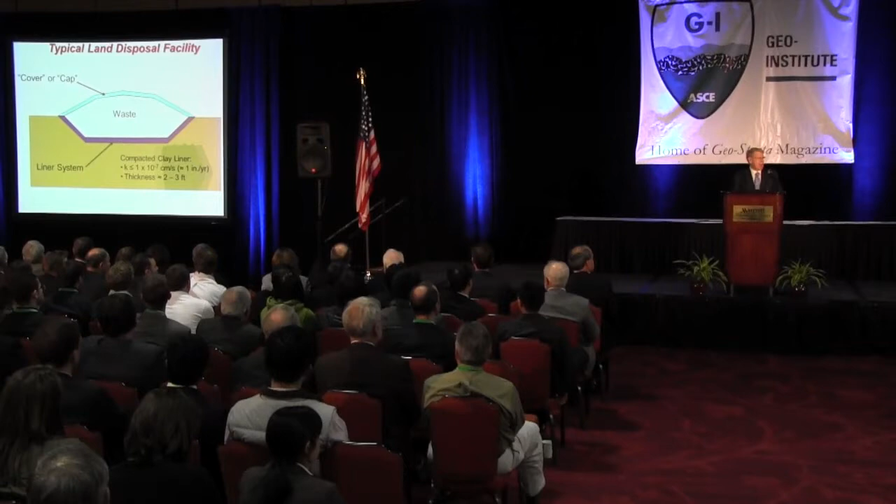As way of background, we'll be talking about waste materials, either in landfills or sites requiring remediation, that often have a cap above them and some sort of liner perhaps below them. I use the word system for liner because it often contains many layers and many components. I'm going to principally focus on the earthen liner or compacted clay liner.

By regulation in the U.S., at least environmental regulation, that hydraulic conductivity or permeability, and I don't care which you call it, pick your favorite term, K, has to be less than 1 times 10 to the minus 7 centimeters per second. Where did that number come from? It came out of absolutely thin air with no basis to it whatsoever. And in fact, 1 times 10 to the minus 7 centimeters per second is about equal to 1 inch per year. And I always thought some engineer decided to confuse some lawyer by using 1 times 10 to the minus 7 centimeters per second instead of 1 inch per year, simply in an attempt to raise our hourly compensation up to that comparable to the legal profession.

But worldwide, that is essentially the standard except for one country, Germany. Their standard is 0.5 times 10 to the minus 7 centimeters per second as the maximum allowable permeability. And as best I can tell, that's simply a matter of German engineering principle. Whatever the Americans do, the Germans are going to be twice as good as that. The only technical basis for 5 times 10 to the minus 8 centimeters per second is at that level of hydraulic conductivity, chemical transport tends to be mostly by diffusion rather than actual physical movement of the water. And the liner thicknesses vary from less than a foot to more than 5 feet, but typically are on the order of 2 to 3 feet.

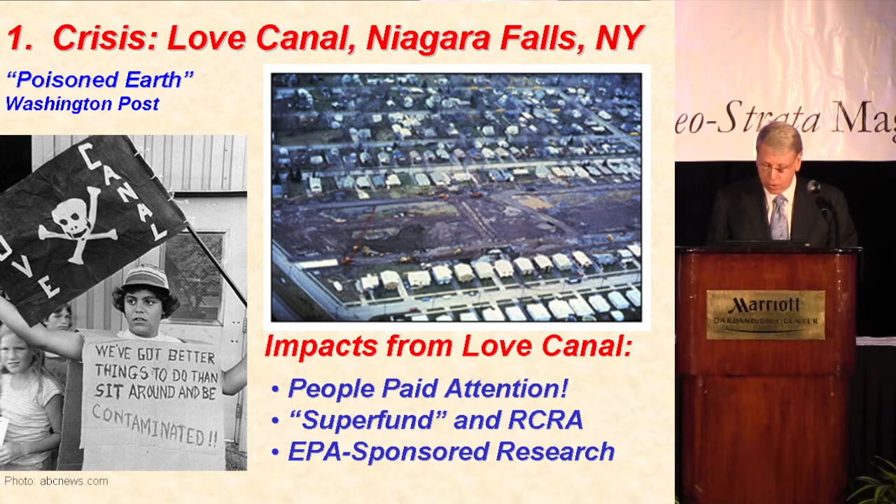It also led to the Resource Conservation and Recovery Act, or RCRA as it's shown here, which was really the set of regulations that dictated requirements for treatment and disposal of waste. So for people interested in landfill design, it was the RCRA laws. And very important for me as a brand new assistant professor, they actually put some research money behind all of this.

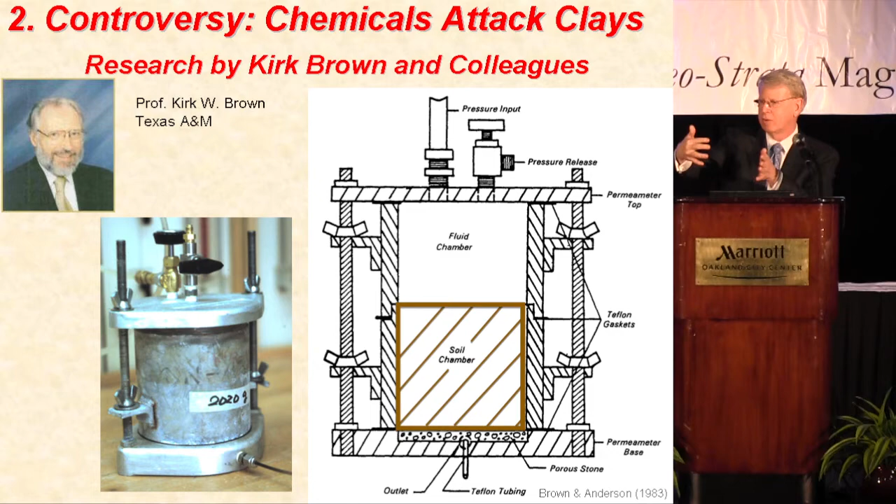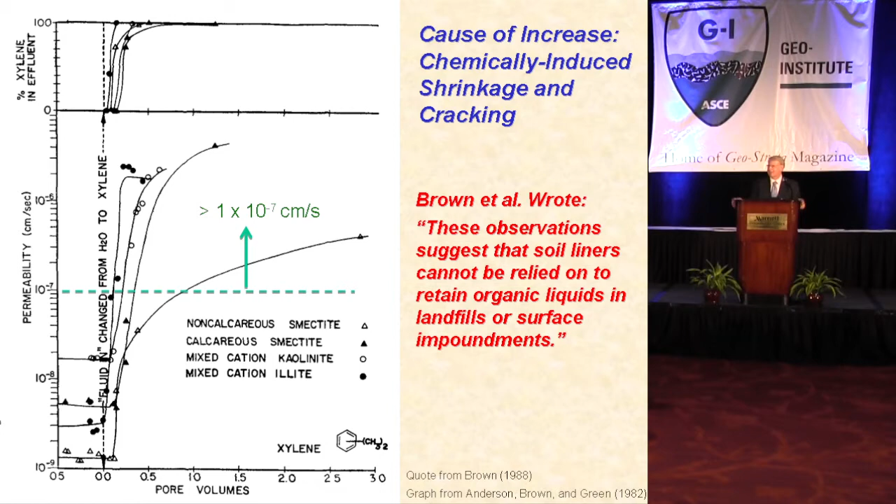Now, perhaps some of you have experienced this yourself. I'm told that if you've had way too much alcohol to drink, you may wake up in the middle of the night very thirsty with dry throat. And the reason is that the ethyl alcohol tends to desiccate the cells, just as xylene will tend to desiccate clay. I'm just told that's the case.

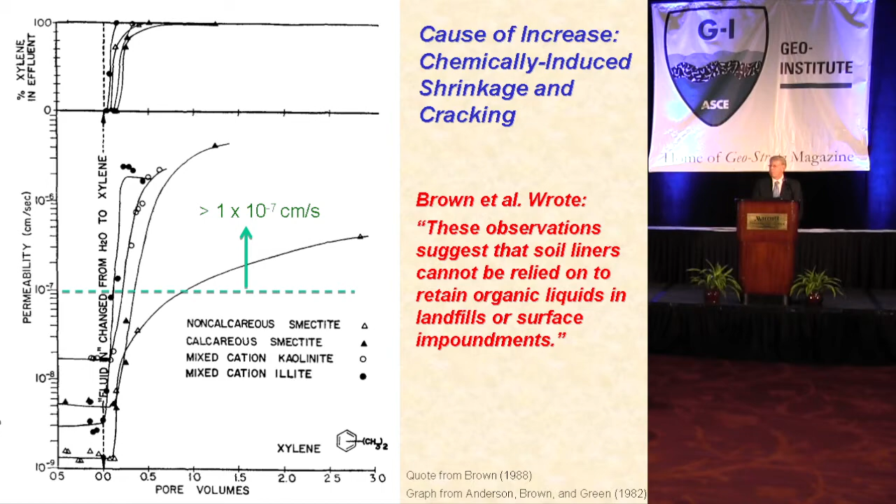I can't confirm it. But Brown and his co-workers wrote, these observations suggest that soil liners cannot be relied on to retain organic liquids in landfills or surface impoundments. Wow, everybody was putting organic liquids in small or high concentrations in landfills. Everybody was using clay, basically Brown was telling the world that what we were doing was all wrong, and it was not well received.

At any rate, the main criticism of Brown's research, aside from using very high hydraulic gradients, is that the shrinkage of the test specimens should cause the specimens to pull away from the rigid walls of the permeameter.

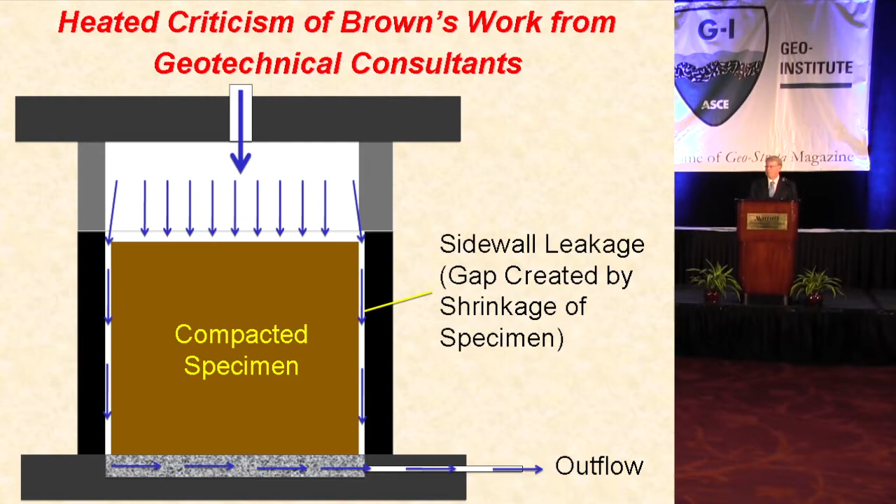And the argument went that, in fact, Brown wasn't measuring the hydraulic conductivity of the clay. Brown was measuring sidewall leakage around the clay, and therefore the test results were invalid. And I remember at the time thinking, well, the test results may be invalid, but what's absolutely clear is that these organic chemicals are very damaging to clay.

And if you've never seen this yourself, just take some bentonite or other clay, mix it with water, and of course it'll make a nice moldable pottery grade type of clay. Take that same clay, don't do this in your home, mix it with turpentine or gasoline or something like that, and it will have no plasticity whatsoever. It will feel like sand, not like clay.

At any rate, Brown got more money from EPA, got a lot of people coming in to visit him, got severely criticized for flawed tests, so they built some large-scale field tests, 2-meter by 2-meter plots. They were criticized for using reagent-grade chemicals, so they used real spent solvents from the paint industry, and they found the same results. The impacts were very significant. It reinforced the EPA's decision to ban liquid organic waste from all land disposal units.

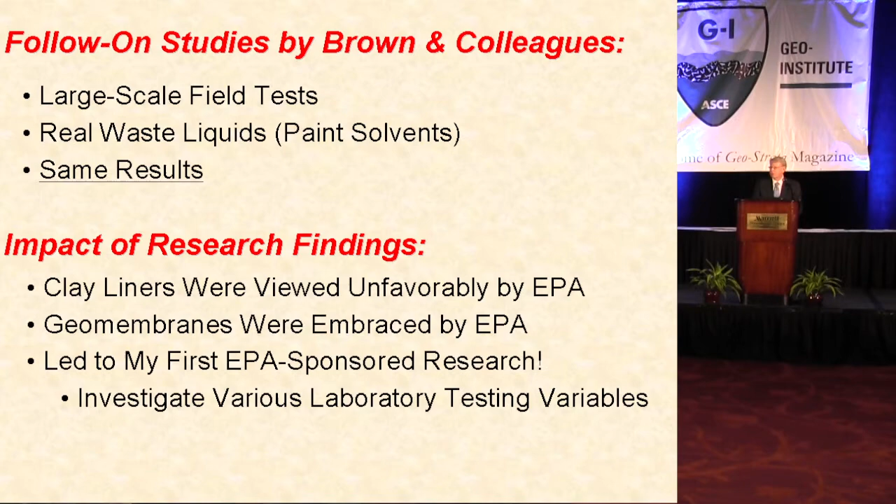And in fact, it made the EPA very skeptical of clay in general. And indeed, they immediately latched hold of geomembranes as the preferred method of waste containment. So if you're a geosynthetics person, you owe your career to Kirk Brown and EPA's reaction to these test results. But most importantly for me, it caused EPA to give me my first research grant, first of many for about 15 years, to start investigating some of these issues.

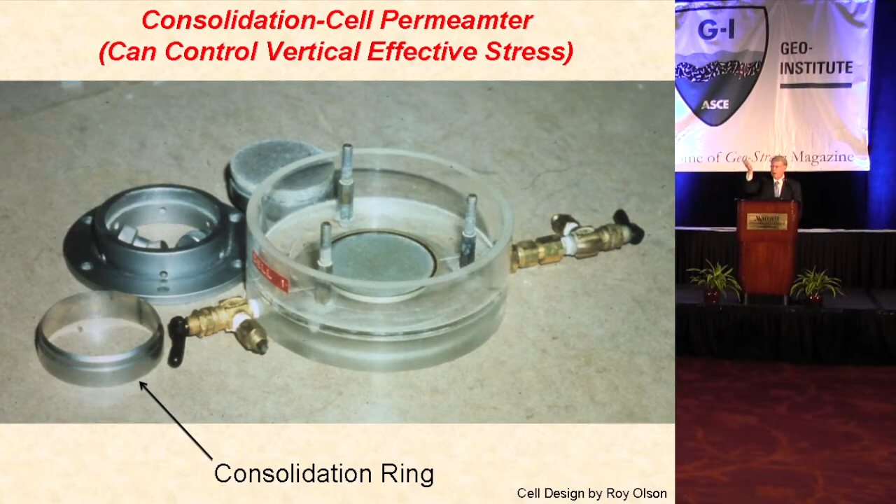So we, as you'll see in a moment, used different types of permeameters and tried to sort out some of the testing variables. This is the consolidation cell permeameter that Roy Olson designed and built. You don't compute hydraulic conductivity from consolidation, but you literally flow water upward through the consolidation cell. It's really a wonderful device for measuring hydraulic conductivity. You just need to be careful that the permeating liquid doesn't dissolve the cell itself, but if you do that, all works out well.

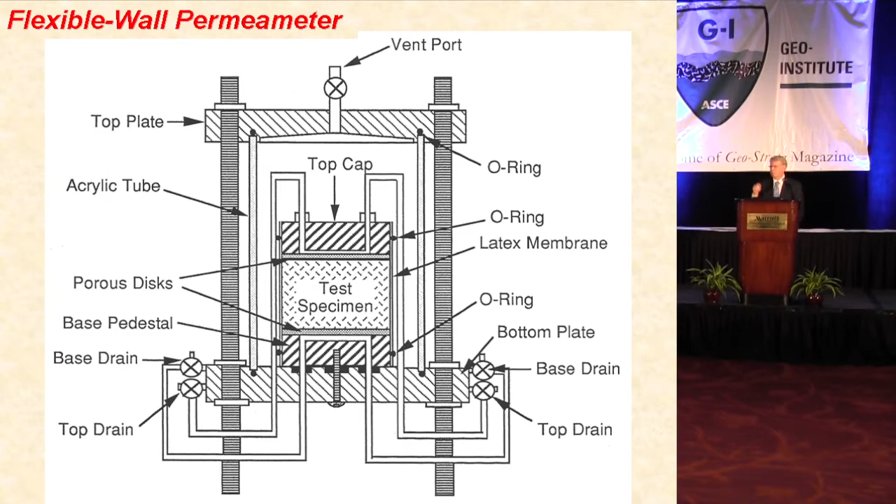For the most part, we use flexible wall permeameters. These are really just triaxial cells, and the modifications were really pretty simple. We had to have different size base pedestals to test different diameter samples. And so typically we tested 4-inch diameter samples, and we had to make some parts out of stainless steel and Teflon so things wouldn't be dissolved, and we had to have more drainage lines to the top and bottom so that we could replace water with an invading liquid, for example, but otherwise it's pretty much a triaxial cell.

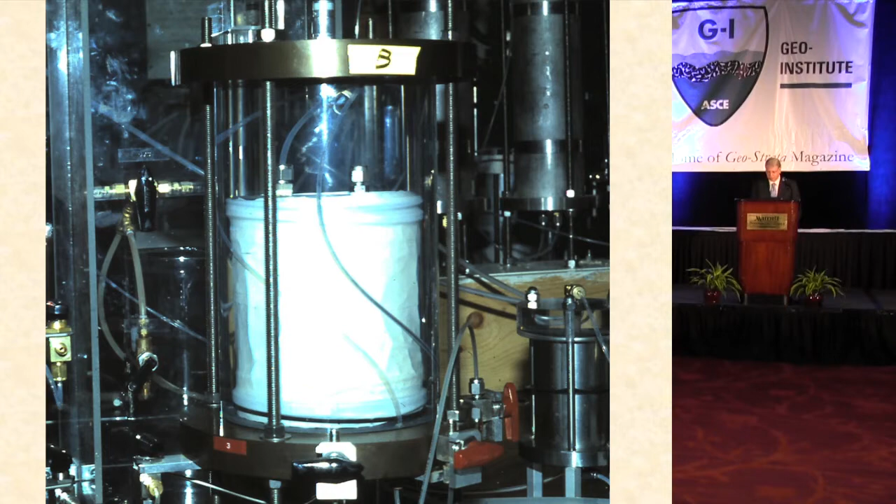So I had the pleasure of designing and working with machinists and building about 25 of these cells in our laboratory, and it required inflow and outflow reservoirs and pressure systems, and we had tubing everywhere. It looked like one giant spaghetti factory. But one of the very humbling things for me is when I wrote my proposal to EPA, I figured out how many liquids I wanted to test, how many gradients I wanted to test, how many replications I wanted to have, made that matrix up, and discovered it couldn't possibly be done. I had to use fewer liquids, fewer reps, and so forth. But it did require quite a bit of equipment.

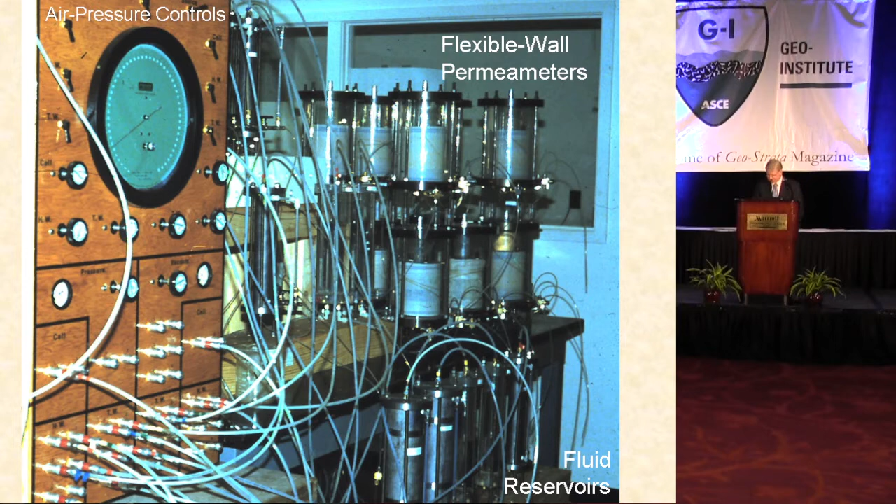And of course, today, this is all much simplified. The flexible wall cells perhaps haven't changed that much, but the panel boards are much, much better for controlling flow. And in fact, the whole set of measuring systems is much more sophisticated, including flow pump methods.

One of the challenges we had to overcome is the fact that the latex membrane that you put around a triaxial sample is essentially soluble in the organic liquids that we were permeating these samples with. And so we had to find some way to keep the liquid from dissolving the latex membrane. I'll confess this was purely by accident. I was thumbing through a chemistry catalog and I saw a 6-inch wide roll of Teflon tape that was adhesively backed, and it was meant just to spread down and sort of tack to the surface of a countertop.

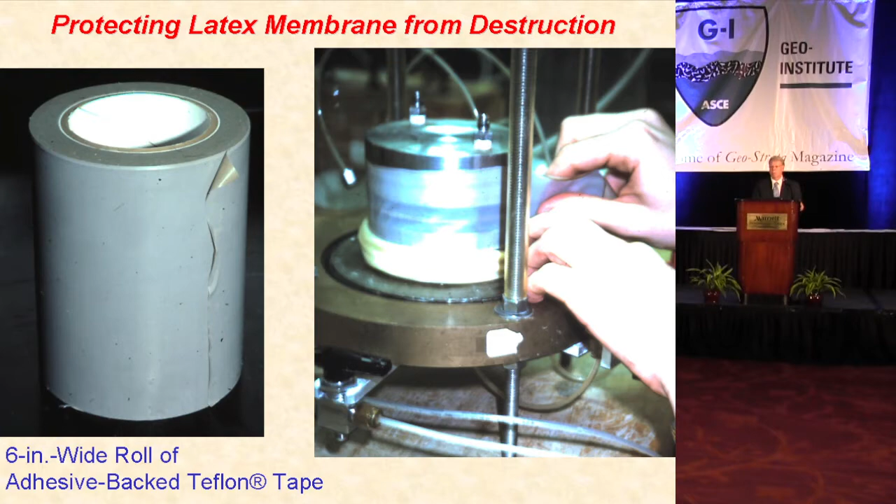And so I thought, what the heck, I'll buy it. It was probably $300 for the one silly roll. And we tried wrapping the sample with just one layer of Teflon tape, and it worked beautifully. It absolutely was spectacularly effective in stopping the organic solvents from destroying the latex membrane.

We also had to find a way to keep some of the really nasty liquids we were using from getting into our hydraulic system. So Steve Trautwein came up with this device that he calls the bladder accumulator, which separates water that's on the top of this diaphragm, water that goes back to your control system so you can keep it clean and uncontaminated and out of trouble, from the permeant liquid, which may be very nasty, going on to the test specimen.

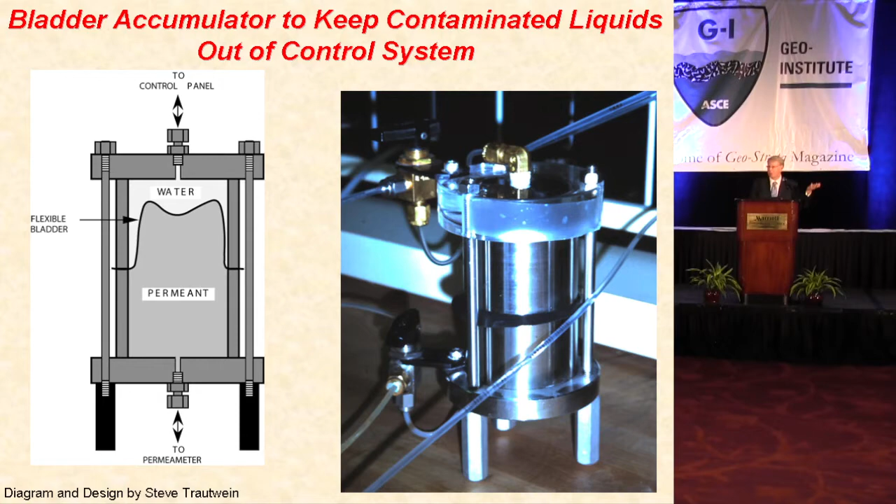That worked really well, and you could pick a flexible diaphragm material that's compatible with virtually any liquid. So there we go, flexible wall permeameters, Teflon tape, then latex membrane covered with accumulators and all sorts of systems. So here's what we found.

One of the questions was, well, it's one thing if concentrated organic liquids destroy clay, but a lot of times the organic liquids are present in small concentrations. Do small concentrations also adversely affect clay? So here's some data for kaolinite. You see fixed wall cell. That's actually a compaction mold permeameter with no vertical stress on it. And the data for the flexible wall cell showing a bit lower hydraulic conductivity.

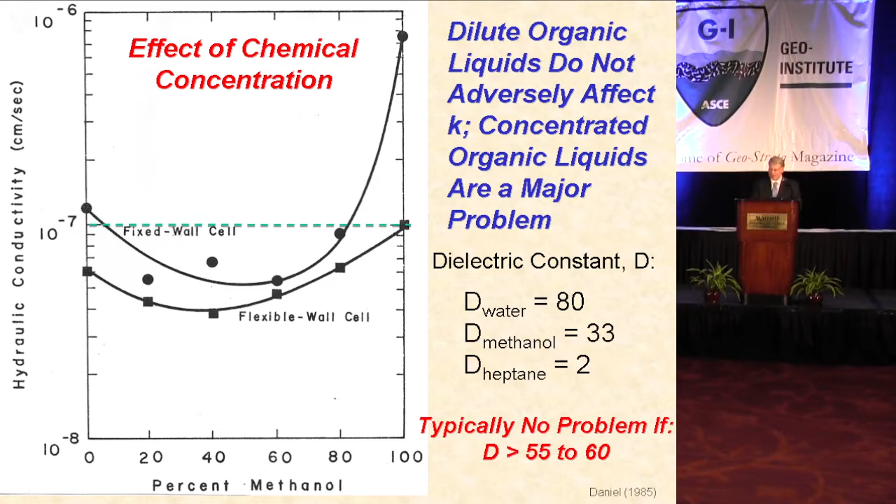But over on the left side, this is for pure water. Over on the right side is for pure methanol. You can see that with concentrated liquids and at least some permeameters, there were deleterious effects. Well, a whole bunch of research later, here is basically the story. Water is a polar chemical. You may remember that the H bonds are at 105 degrees from one another, and so it's a polar molecule. That's why your microwave oven works, because the oscillating magnetic field makes the water oscillate.

But things like heptane and xylene and carbon tetrachloride and benzene and gasoline, for that matter, are nonpolar. So the dielectric constant is sort of a measure of this parameter. For water, it's 80. For heptane or gasoline, it's 2. And experience has shown that as long as the dielectric constant is up fairly close to water, greater than something like 55 to 60, the presence of the small amount of organic chemical has no deleterious effect. In other words, there's enough polarity to the mixture that it doesn't create a problem.

So if you have 100 parts per million of benzene in water, could that harm the permeability of at least these types of compacted clay? Absolutely not. There's just not enough organic liquid present. So it's really the concentrated organic liquid that is of concern. Those are no longer in landfills, but they're certainly in pipelines and in storage tanks.

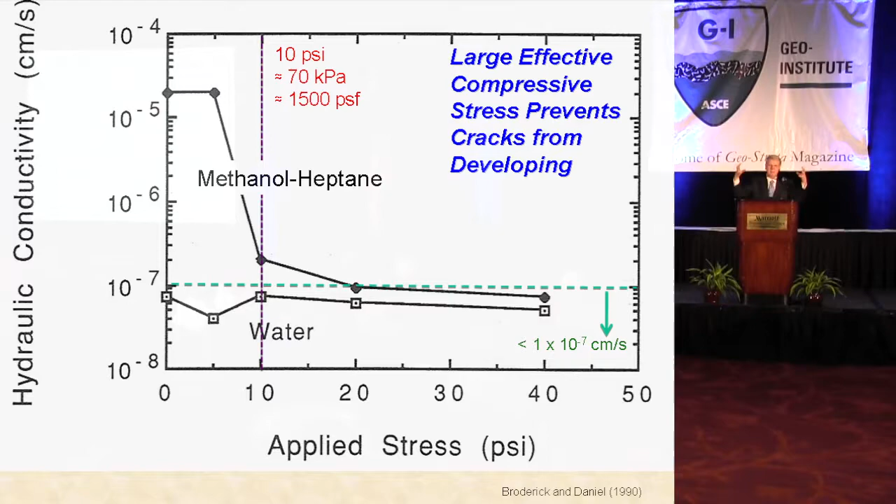And you can see for vertical effective stresses greater than about 10 psi or so, there's not a terribly significant effect. And the reason is, remember, the chemical tends to cause the clay to shrink. That's only a problem if the clay cracks. And in principle, as long as there's enough vertical effective stress, the clay may shrink. In fact, it may just shrink to a lower void ratio, but it may not necessarily crack.

This question came up in Professor Benson's Peck lecture the other day about GCLs, and my guess is the same phenomenon is true with GCLs, but I think it's a great area for further testing because it's just a hypothesis.

This also says, for example, perhaps not to have so much concern about deeply buried liners with high vertical compressive stress on it, but you ought to be terribly concerned, let's say, with a liner near the surface for a secondary containment structure around a big oil storage tank, because there's almost no vertical stress on that near surface liner, and that clay clearly is vulnerable to attack.

Well, if all else fails, you can just mix the clay soil with some sort of a stabilizing agent. And we, in fact, mix clay with sodium silicate, shown here, with lime and with Portland cement. And our theory was, well, if it's the shrinkage that causes the cracking, we ought to be able to add a cementitious material to the clay that will stop it from cracking.

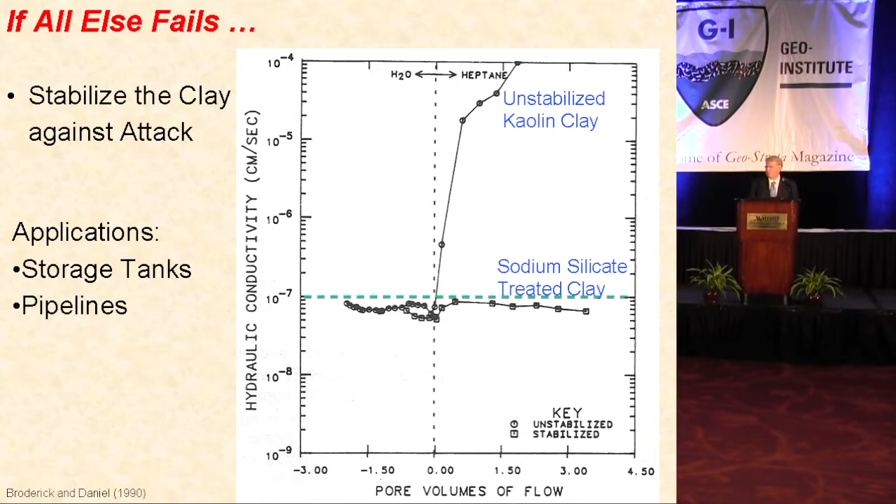And that's precisely what happened with lime, Portland cement, and sodium silicate. It just sort of made the material sufficiently rigid that there was no shrinkage cracking, and the hydraulic conductivities were not necessarily impacted. So even if you want to use clay at a low effective stress, there may be a solution, but it probably involves some significant engineering.

Let me switch gears now and start talking about field permeability, totally different subject. So I was sitting in my office one day, maybe a year into my tenure as an assistant professor, trying to figure out what the heck I was going to do to get research money and so forth, when a call came from somebody in San Marcos, Texas, which was about 40 miles from Austin, and he said he had a pond near their manufacturing plant, and the pond was leaking so fast they couldn't keep it filled with water. Would I come out and take a look? And I said, sure, I'll be right out there.

So here's a cross-sectional diagram of this freshwater pond. The geotechnical engineer who had been hired to do this excavated 5 feet of clay near the surface to make the pond. They took the excavated clay and put it back in two 6-inch thick layers or lifts to build a low permeability liner. It was a fine clay, plasticity index of 19%. The geotechnical report indicated that the permeability would be about 1 times 10 to the minus 8 centimeters per second, and the leakage from this pond, a completely unremarkable 0.07 gallons per minute.

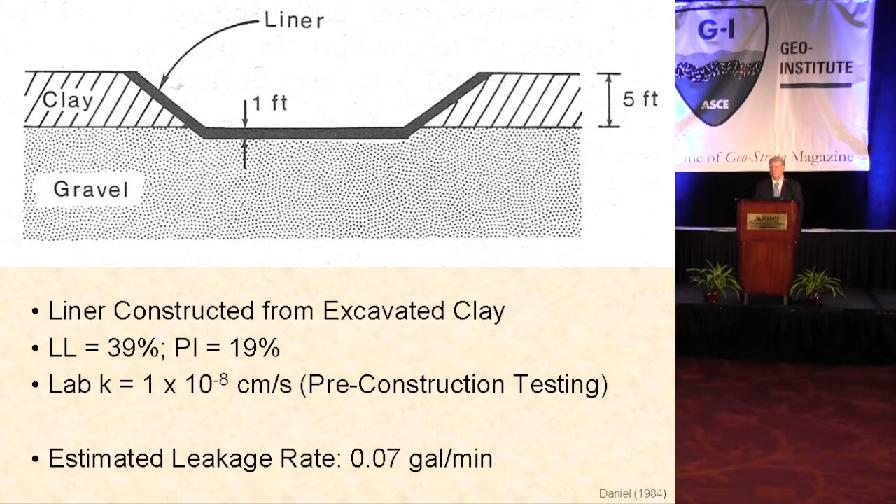Well, the actual leakage rate was at least 20 to 30 gallons per minute. They had a water well to pump water into the pond, and they turned the water well pump on maximum, and they never could fill up the pond, so that was the leakage rate. So I calculated the permeability from that known flow rate, and it was 2 to 5 times 10 to the minus 5 centimeters per second. The owner drained the pond. Actually, all the owner had to do was stop the pump, and it drained itself. Very simple drainage. And I went around and looked at the liner.

In fact, what I was really looking for was penetrations. I figured from what little I knew about roofs, if there was a leak, it was probably a pipe or something going through it that was not properly sealed. And there were no penetrations. That was not it. So I took some samples. Actually, I took one of Professor Olson's consolidation rings, hand-trimmed some samples from the liner, ran permeability tests in the lab, and got about 9 times 10 to the minus 8 centimeters per second. Still a permeability far, far less than the known value from the known leakage rate.

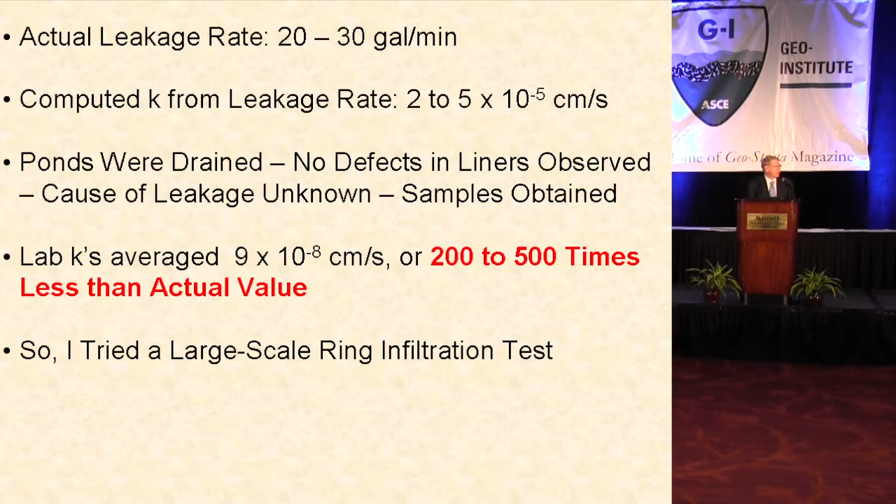So I thought, well, what do I do now? And I thought, well, let me try a bigger test. And I had no idea what sort of test to run, so I decided I'd just do a single ring infiltration test. I'd build a ring, embed it into the liner, and measure the rate of flow into the ring or into the soil. This is not a very good device because you cannot measure low flow rates. 10 to the minus 7 centimeters per second is only 0.003 inches of water level change, which is far, far less than the evaporation in Texas on almost any day, and too small in any case to really measure. You also have issues of lateral flow near the edges, but you can just draw a flow net and make that correction. That's not a big deal.

So I bought some sheet metal, went out. This was an 8-foot diameter ring, filled it with water, covered it with a tarp. I thought this thing in the lower right corner was brilliant. This is a tube to measure the water level, and I put it on a slope next to a meter stick so I could get better resolution on the water level. But it turned out I didn't really need it. It leaked quite a bit. Measured the hydraulic conductivity.

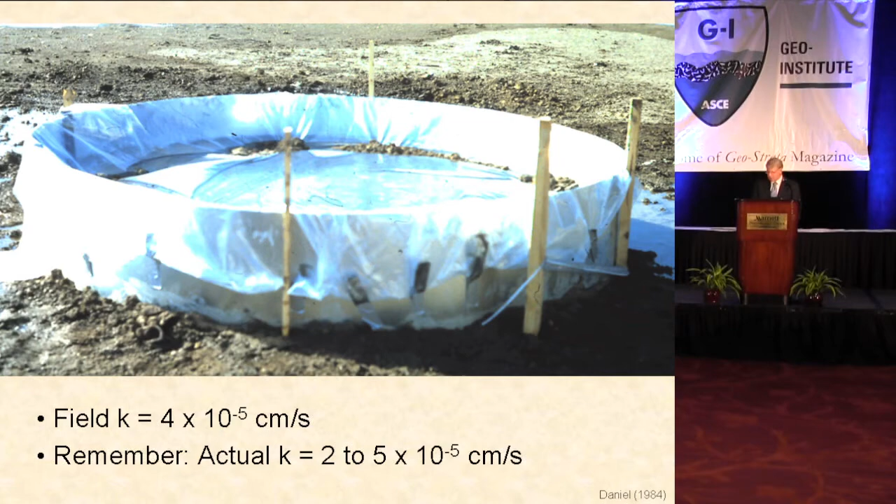It was 4 times 10 to the minus 5 centimeters per second, which was almost exactly equal to the known actual rate from the full-scale liner. My conclusion was that the liner had been built and maybe it had dried out. They hadn't taken care of it, but in any case, it was in fact not a very good liner as measured by that field test.

So I went to the EPA and said to them, hey, there perhaps is something anomalous going on between lab and field tests. How about if we do some more experiments? And they had plenty of money. It was that era, and they said, okay. So we built, actually Steve Day, my student, built 2 prototype liners at a site near Austin, Texas.

Now, for those of you from Georgia Tech, this handsome man right here in the jeans with the shirt off is a young Glenn Rix out there helping Steve Day. And down in the lower slide, this is Bill Isenhower, who's right up here in the front row. And he'll tell me who that is. I think that might be Clark Morrison. But at any rate, our students were always so great in helping one another out.

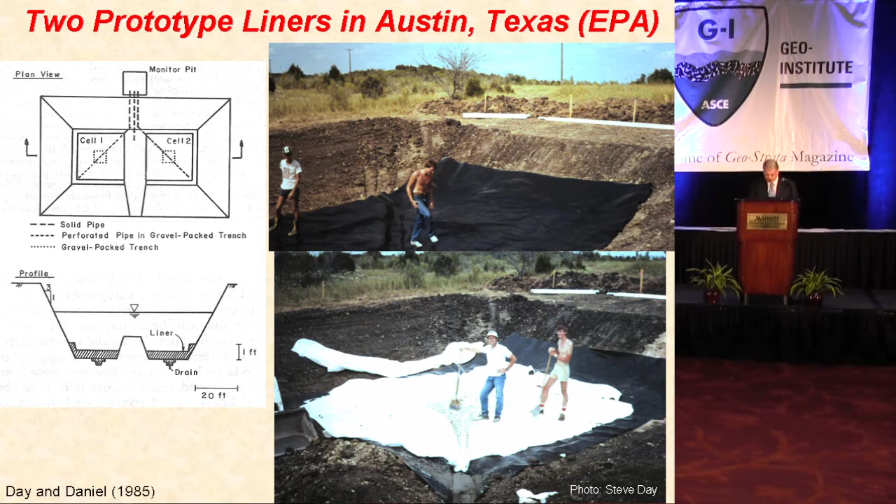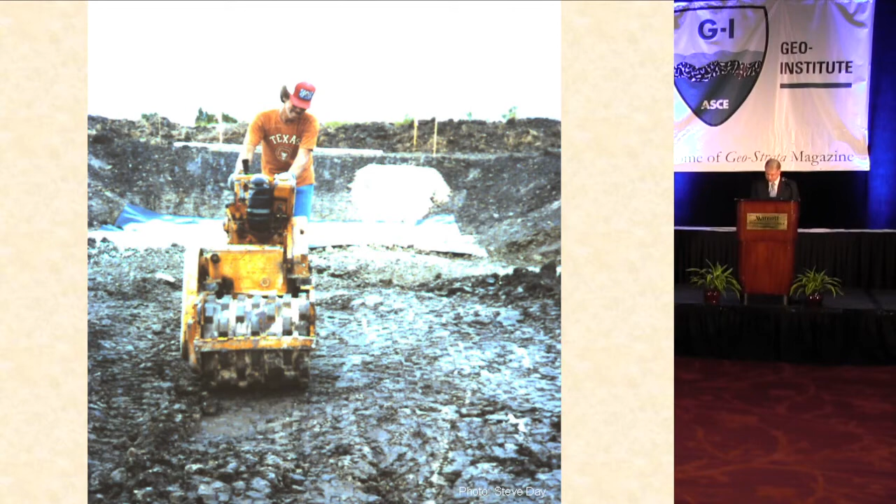So we built 2 prototype liners with an underdrain beneath so we could flood them and know precisely what the permeability was based on the flow rate that came out the bottom. We flooded them for 2 months. We, meaning Steve Day, did, measured the flow rate out the base, and calculated the hydraulic conductivity. So here are the results.

Steve built 2 liners with a lower PI and a higher PI clay. You can see the laboratory hydraulic conductivities. I'm missing a second there on centimeters per second. We're in the range of 10 to the minus 8 centimeters per second or lower. The actual field rate measured from flow out the base was in the range of 10 to the minus 6 centimeters per second. In other words, our undisturbed samples, 3-inch diameter, thin-walled Shelby tube samples, underpredicted the actual hydraulic conductivity

by 1,000-fold. And we wrote, quote, these results, coupled with other published data, lead one to question the applicability of laboratory permeability tests for predicting field hydraulic conductivities of compacted clay liners.

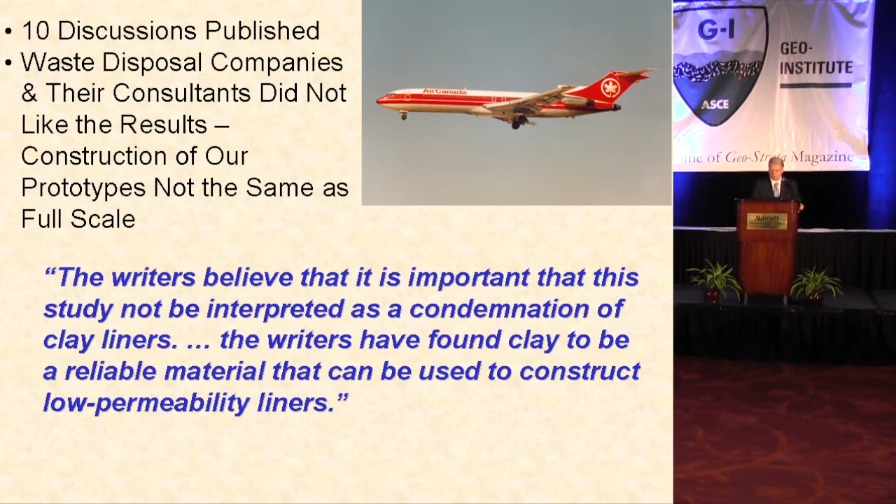And in fact, one of the valid criticisms was that this was just a test on prototypes, and I was so careful to use the word prototype in the title of the paper. Everywhere I wrote, prototype this, prototype that. Well, at least according to the consultants, the regulators ignored the word prototype and just took it as full scale. So at any rate, this is from one of the discussions. The writers believe that it is important that this study not be interpreted as a condemnation of clay liners. The writers have found clay to be a reliable material that can be used to construct low permeability liners. That was in essence the criticism.

I was really taken aback by this, and I turned around to these guys and said, what do you mean reliable? How do you know it's reliable? There were no measurements whatsoever on how the clay liner was actually performing, and I would just say that's purely speculation on their part that it's reliable, because these are buried in the ground, and if they leak, as Love Canal even showed, it may be decades later before the failure of that system to function would really show up. But the good thing was that led to more research funding.

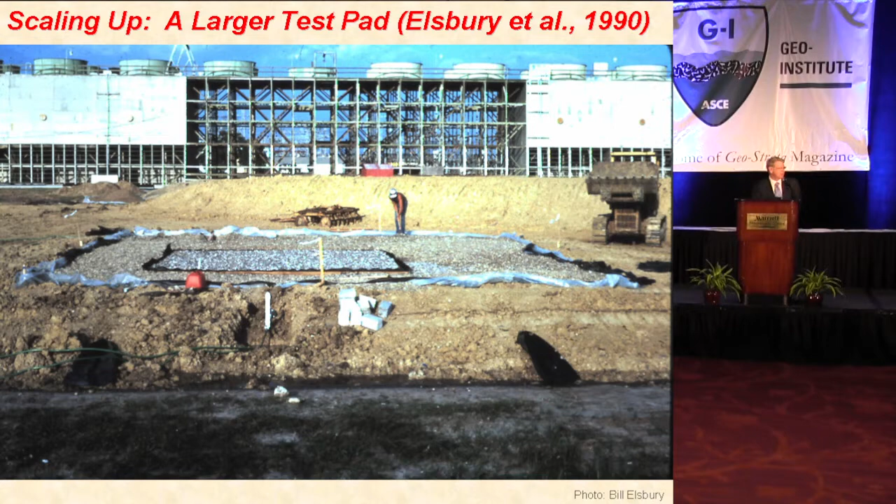And the next EPA-sponsored research, they decided, well, maybe we better send this to a consulting engineer. So Bill Elsbury worked for McClelland Engineers in Houston, and we were sort of the sub to them, and they were charged with building a full-scale liner, not a prototype, a full-scale liner. So they built an underdrain as well. This is a picture of the gravel. The clay liner would be built above that. This little pipe actually collects the underflow, or the flow out of the base of the liner. They used what was common in Houston at the time, a pad foot roller. They tried it with the vibratory compaction on and off.

It was a very high plasticity clay, 41%. They wrote the spec as they were normally writing, 4% wet of modified Proctor optimum for the moisture content, and the dry unit weight at least 90% of modified Proctor. It was only a 1-foot thick clay liner built in two 6-inch lifts, and in that sense it might have been a prototype as well.

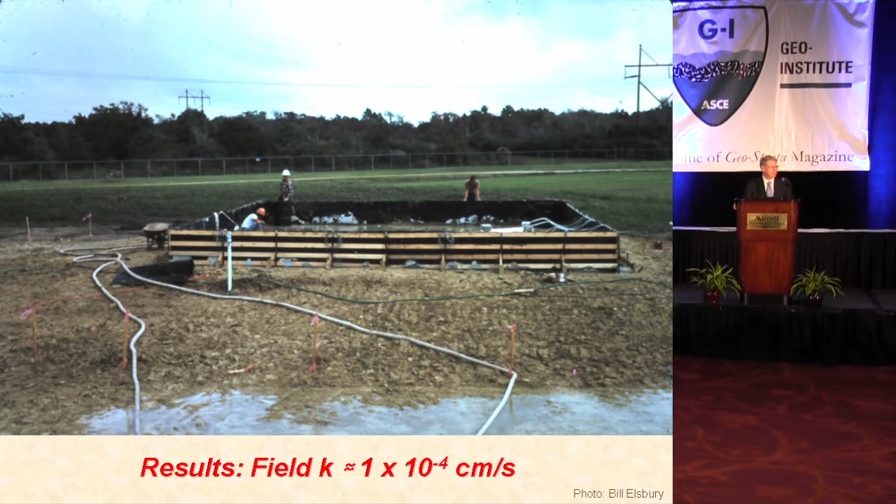They built a little pond around it so they could flood it. The result was that the field permeability was just terrible. It was 1 times 10 to the minus 4 centimeters per second, an absolutely awful clay liner, at least in terms of the hydraulic conductivity. Well, when we studied the actual clay, and Craig Benson did some of these tests, I thought the pictures were really telling.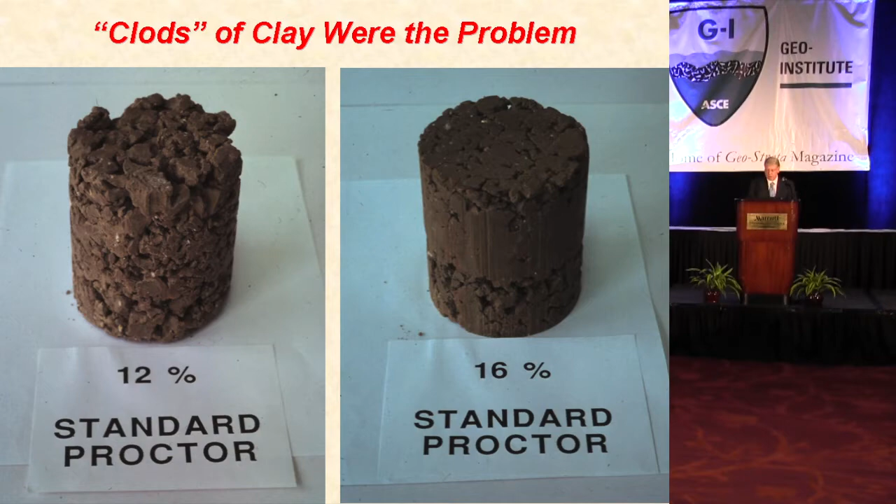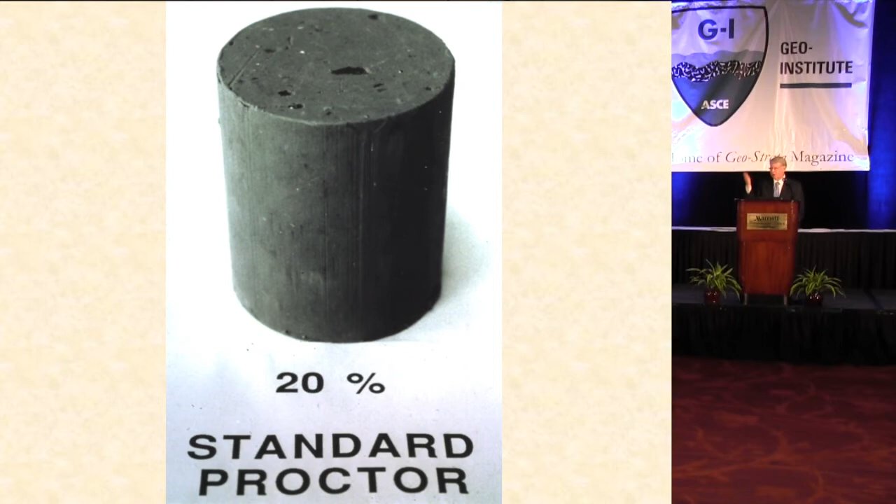When we wetted it up to 16% water content and used standard Proctor energy, you can still see large voids between the clods. But when you wetted this clay up to 20% water content, look how wonderfully homogeneous this is. And you don't have to know anything about permeability to know that this sample is a lot less permeable than the two samples I just showed you before.

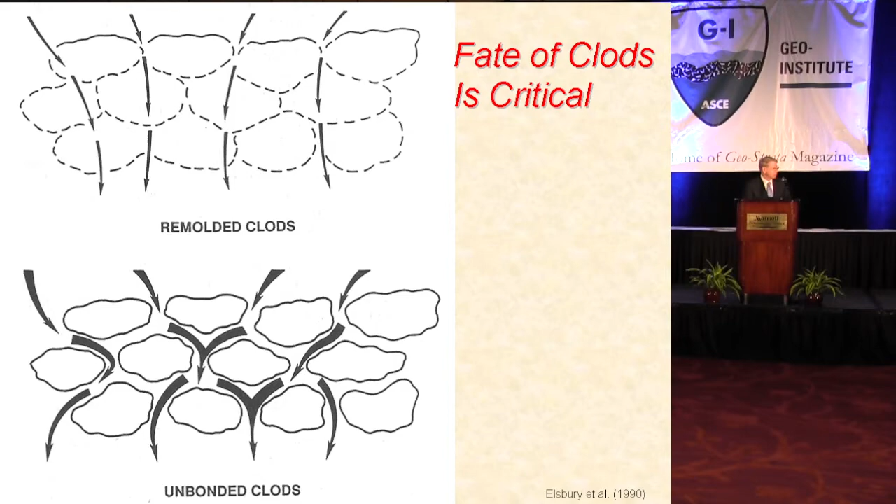So especially for these high plasticity clays, the key is the clods. Your goal as a geotechnical engineer is to wipe them from the face of the earth, destroy all history that they ever existed. And you can do that one of two ways. You can either add enough water to the clods of clay that they're soft and weak and easily remolded into a low permeability mass, or you can attack them with an overwhelming force, compactive energy, and just pound them into submission and squeeze the chunks of clay together so that the large remnant clods are gone.

Another key we found out was actually the interfaces between lifts or layers of clay. So this is a photograph of a 5-inch diameter, thin-walled, undisturbed sample taken of this 1-foot thick liner. And you can clearly see the lift interface at the bottom of the upper lift and the top of the lower lift. And those lift interfaces have a big effect.

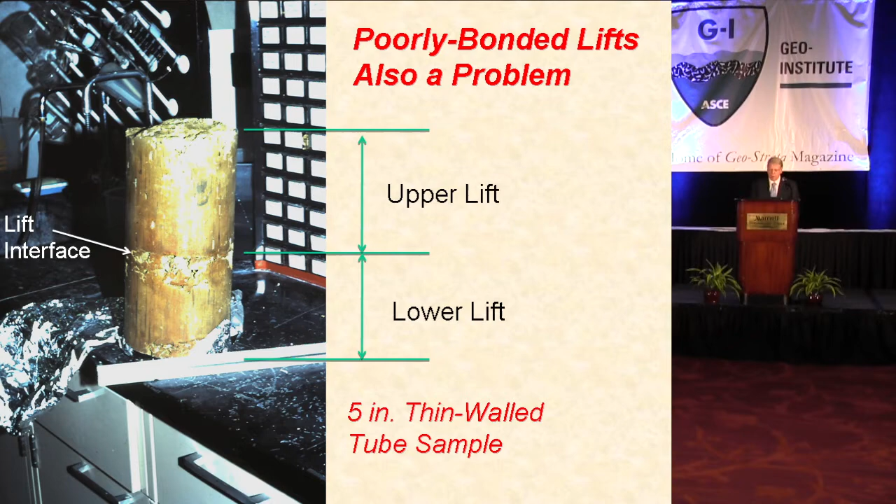So how do you get rid of these permeable zones at the lift interfaces? You make sure you roughen or scarify the surface of a completed lift before you put the next one down. You use rollers that have long, fully penetrating feet, and you pay careful attention to the issue. So now that we had built these various prototypes, it was clear that we needed to go out to large, full-scale, 3-foot thick liners and somehow measure large-scale permeability.

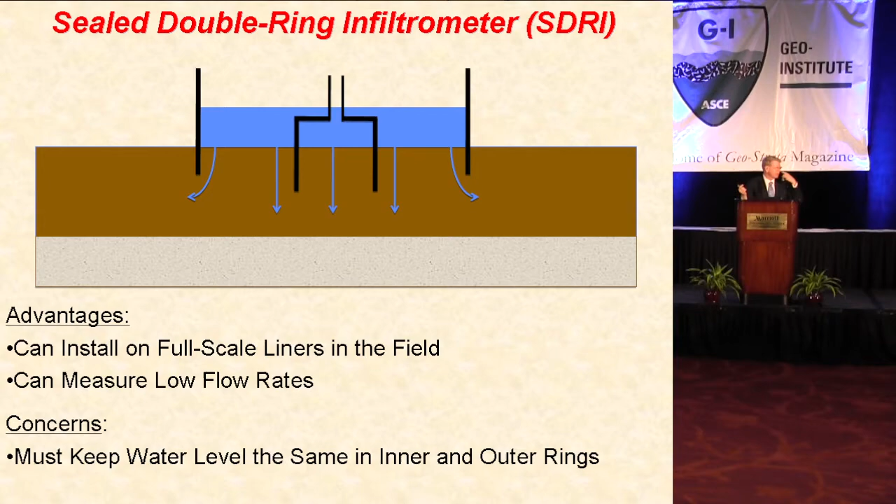So we came upon the idea of sealing up an inner ring in an infiltrometer device, the so-called sealed double ring. And by sealing the inner ring, and really the inner ring is the only measurement component here, you can measure very low flow rates and avoid the problem of evaporation. However, the difficulty is you can imagine a falling head or a rising head test in this standpipe. As soon as the pressure changes, if it stays the same in the outer ring, that inner ring will tend to change in volume. And so you've got a hopeless measurement situation unless you make the inner ring out of 4-inch thick stainless steel.

So, Steve Trautwein, I see Steve in the audience, came up with an absolutely brilliant idea. And the idea was to hook the inner ring up to a small, flexible bag. In this case, it's a medical IV bag that's hooked up. And the beauty of this is the pressure on this flexible bag is always the same in the inner ring and the outer ring. Even if the water level changes in the outer ring, the pressure in the inner ring changes by precisely the same amount.

And when you want to measure the flow rate, you just close a valve, take the bag off, and weigh it. And you can come back and weigh to 1/10 of a milliliter and get very precise measurements. And so, Steve, thank you.

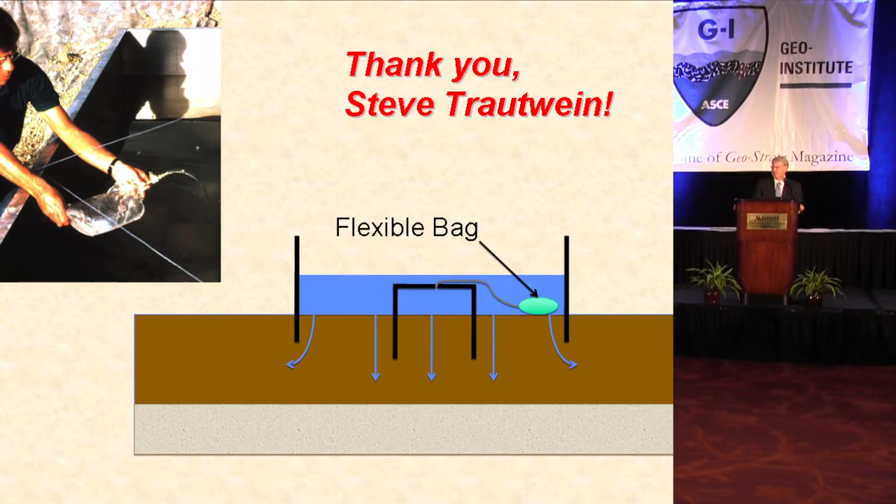We came up with this idea, I confess, sitting in Steve's living room. The IV bags, his wife Lynn, who was a medical student at the time, is right next to him. She happened to have IV bags sitting on the coffee table. We were drinking beer, of course. We were studying this ethyl alcohol shrinkage thing, seeing if it really worked. And Steve, if I remember it right, looked at it and said, what do you think about this? And Lynn, had you not had those IV bags, I don't know that we would have ever come up with the idea.

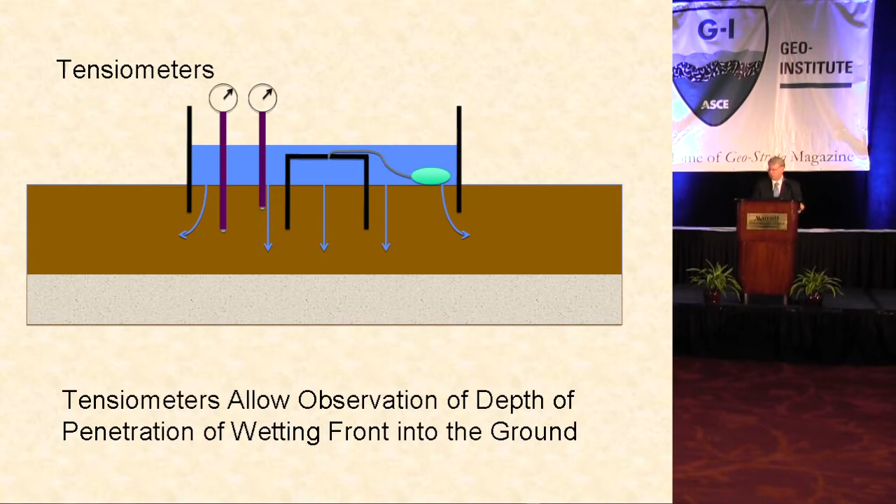We also needed to track the rate of invasion of the wetting front into the compacted clay, because to compute hydraulic conductivity, you have to know hydraulic gradient, and that means you need to know where the wetting front is, how far down it's penetrated. So tensiometers are just negative pore pressure measuring devices, and we put them in at several depths to measure the rate of penetration.

Nobody liked this test. It was the hated test. I remember once doing a short course, and we were sitting with somebody in a bar. There's a trend here, I admit it, on 6th Street, and there was some guy walking by, and he was the most depressed-looking guy I'd ever seen, one of these bums, if you will. He was just depressed as hell, and we were with a consulting engineer, and he leans over and says he probably just found out he has to run an SDRI test.

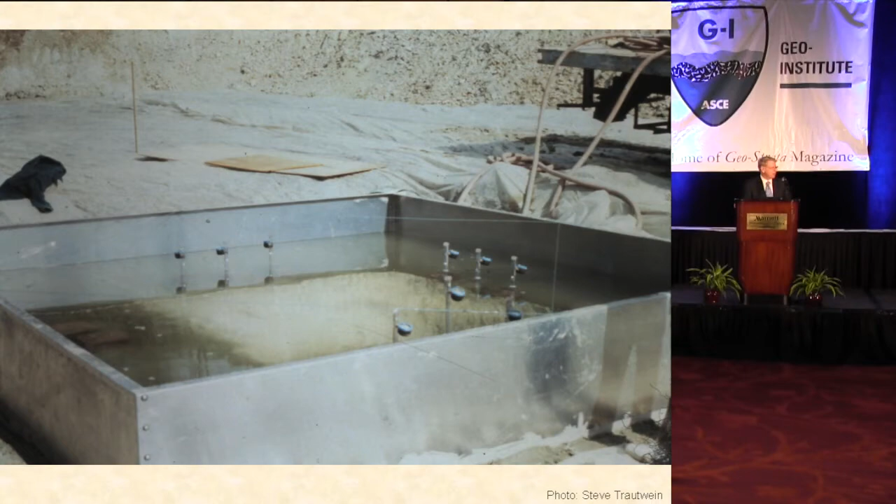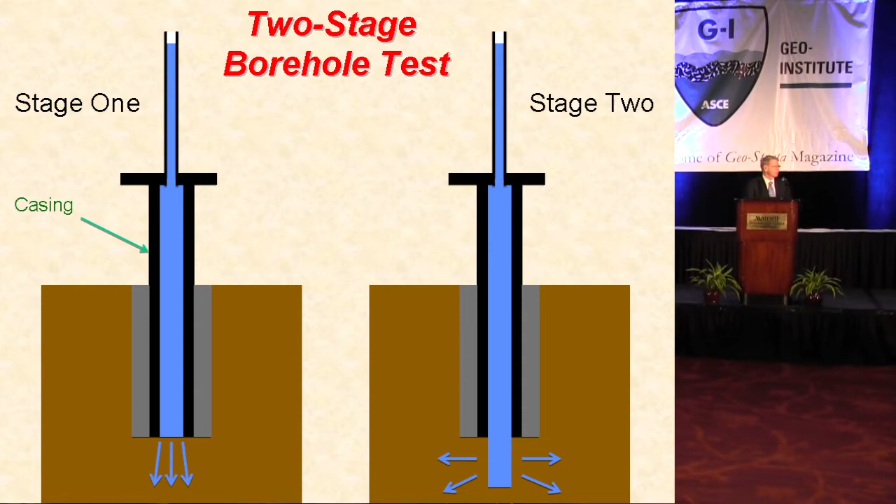So, these were time-consuming, expensive. It takes months to find the results. Nobody liked them, so everybody started hunting for a quicker, faster, cheaper way. And one of those was just a 2-stage borehole test. You just seal a casing in the ground. In stage 1, the casing is flush with the bottom of the hole. You take the top off, extend the hole down below the casing, and run a second stage. You can actually calculate vertical and horizontal hydraulic conductivity.

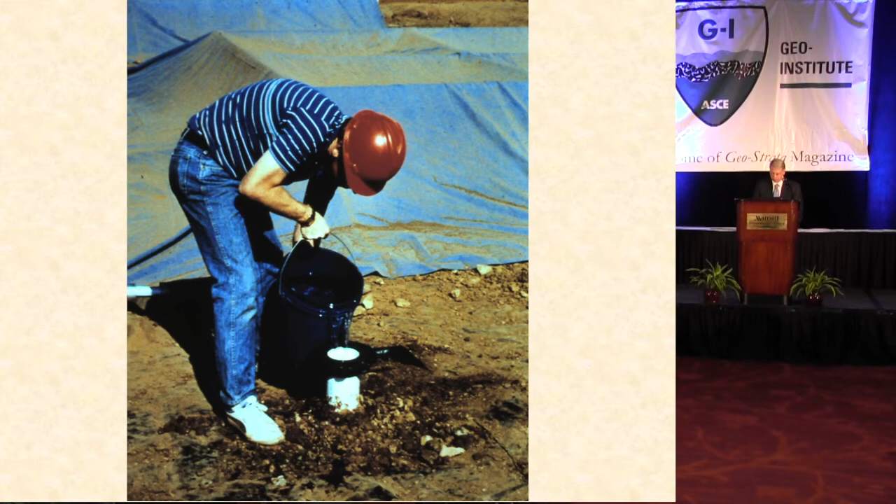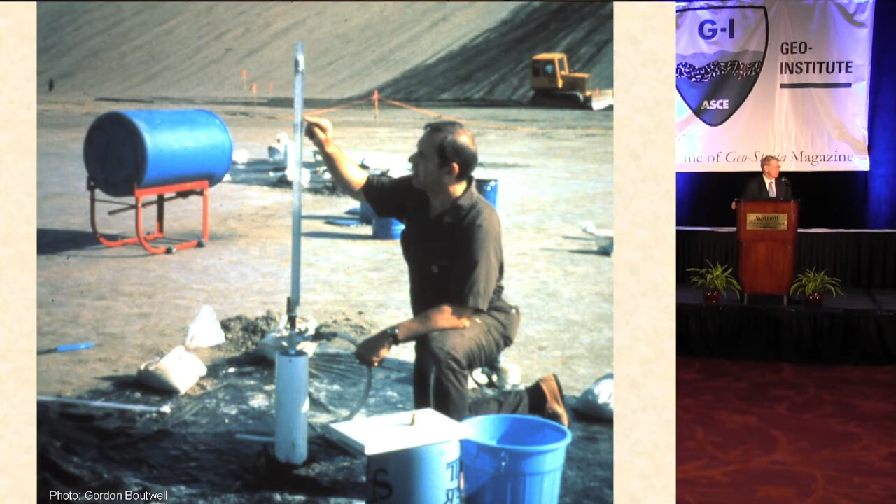I call this the Boutwell test because Gordon Boutwell championed the test. This is Gordon actually tamping bentonite pellets into the annular space between the casing and the borehole. Here I am with about as sophisticated a task as I was charged with, which was pouring water into it. And here's Gordon. It's just a falling head test, which you could run pretty quickly and inexpensively. And pretty quickly, the industry started saying, well, couldn't we do like 5 of these 2-stage borehole tests instead of 1 SDRI test? And that was a really attractive alternative just from a practical standpoint.

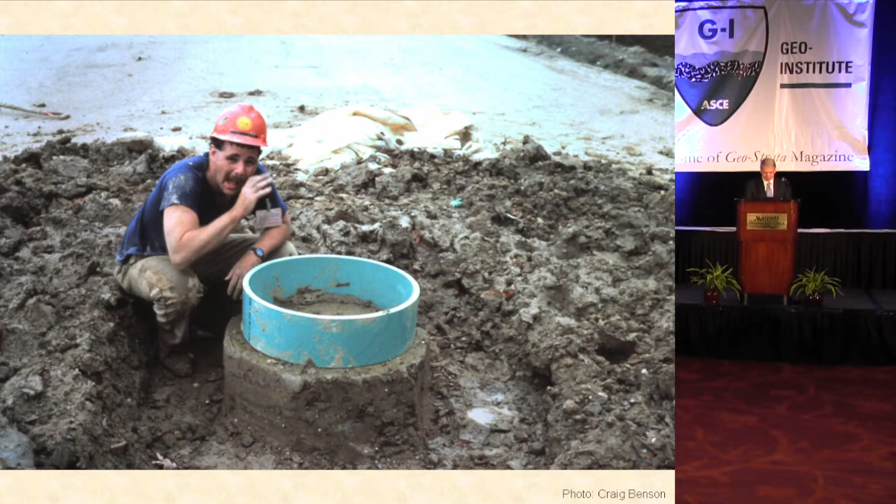So here's what Craig found.

What they did was they plotted the hydraulic conductivity versus the diameter of the specimen. And as you would expect, as the specimen got bigger, the hydraulic conductivity got bigger because your chances just became greater of getting some macro scale feature captured in the test specimen.

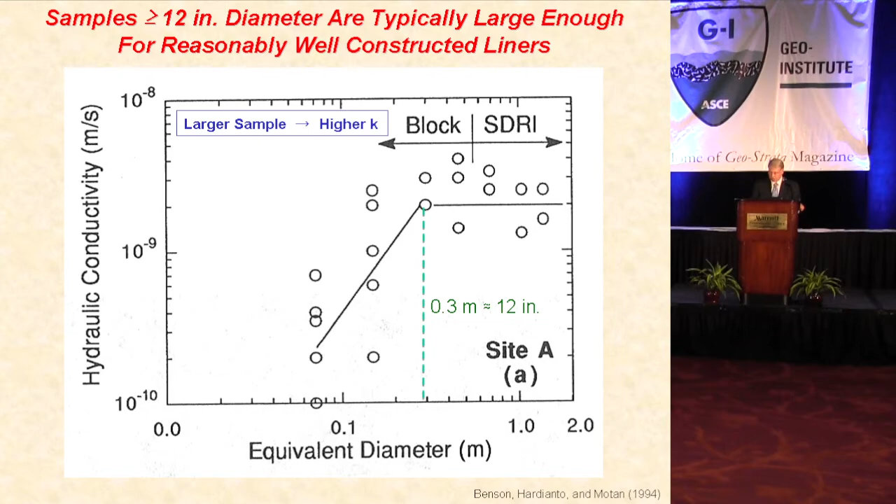But as you can see, once they got to the vertical green line, which is about a 12-inch diameter specimen, any larger than that really didn't tend to have much of an effect. You can see the graph is essentially horizontal after that. So that seems to be a big enough sample size, at least in typical compacted clays, to get good results.

So, armed with these measuring devices, we and others went around the country.

And so many different kinds of compactors by different kinds of people, SDRI tests and other tests run at many sites. And the great thing was phone calls from virtually everybody doing this, and I was just really in a privileged position of essentially knowing what everybody was doing because I was everybody's connection to the US EPA, and it just provided a tremendous wealth of knowledge.

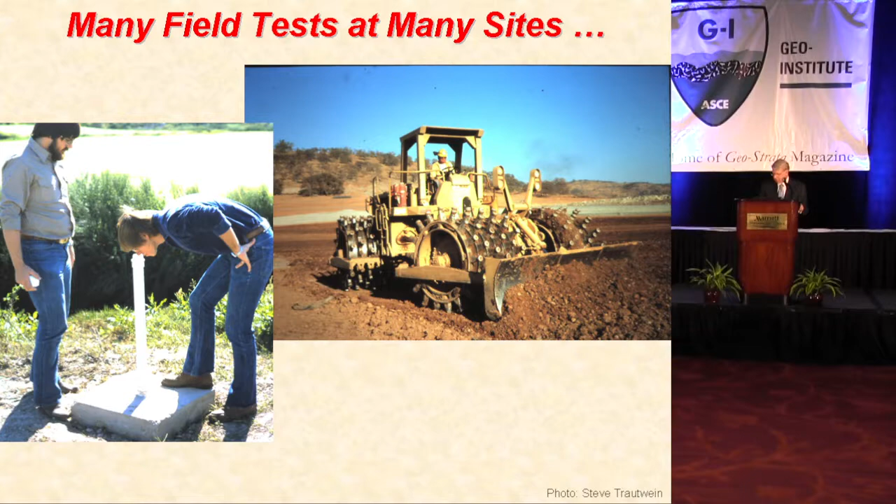And for young academicians, I cannot emphasize enough how useful it was for me, at least, to have deep connections to practice because it really helped to guide the research in useful ways. So what did all this show?

This is from a paper with Craig and Gordon Boutwell, in which 85 full-scale liners were tested. These were all certified full-scale, all had the Good Housekeeping stamp of approval from a professional engineer. This was industry standard practice back in the 1990s, 85 tests.

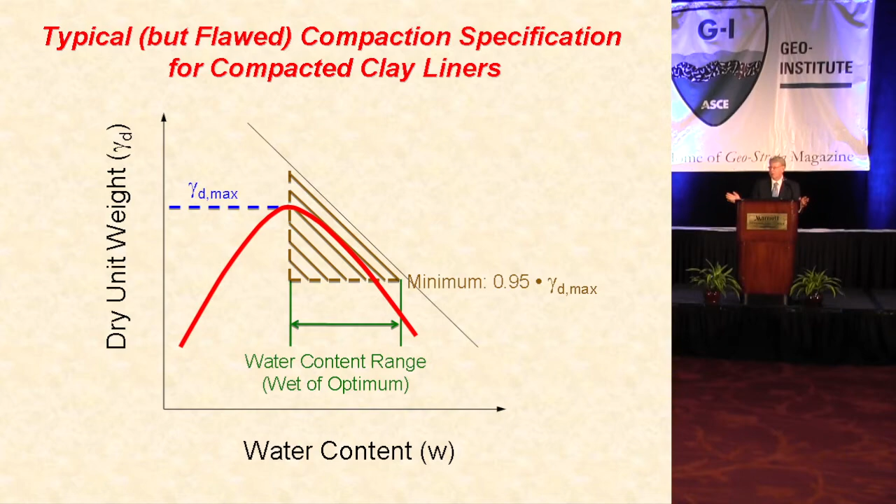And by tradition in fills, you specify a minimum dry unit weight. For example, 95% of the maximum dry unit weight, let's say from standard Proctor compaction. And that means that brown crosshatch zone is the passing zone. Those are moisture contents wet of optimum and above, say, 95% of standard Proctor compaction.

Well, this number P sub 0 that I mentioned before is actually a measure of how many of the field measured moisture density points are on or above the line of optimums. And a line of optimums connects the peaks of compaction curves developed by different energies. So in this example, there are 10 dark circles there. 8 of them are on or above the line of optimums. And so the P sub 0 is 8 points on or above the line of optimums divided by a total of 10 points, or 80%.

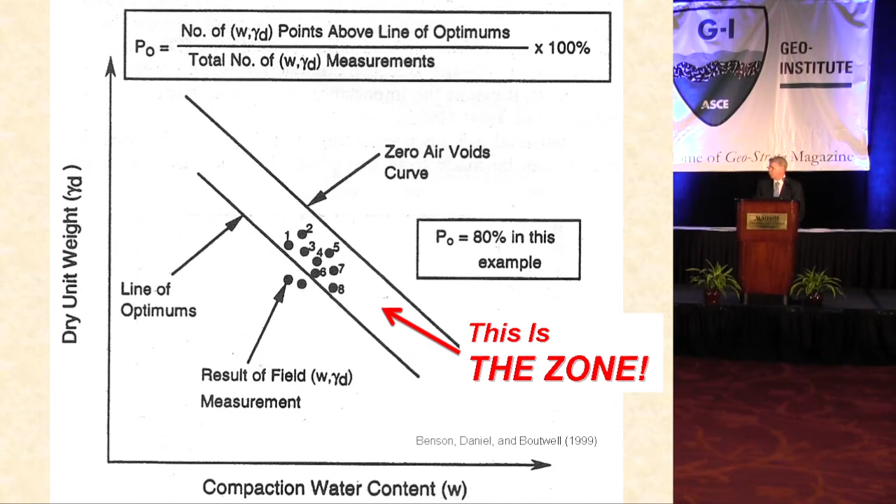And experience has shown that the higher that number, generally speaking, the better off you are. The more of your moisture density points on or above the line of optimums, the better off you are. The problem area is the lower left corner of the traditional compaction specification, the red crosshatch area and the red points here, because that's not on or above the line of optimums. But I might explain it this way. Imagine a point on the lower left corner of that zone. And imagine what the real compaction curve would look like for that point.

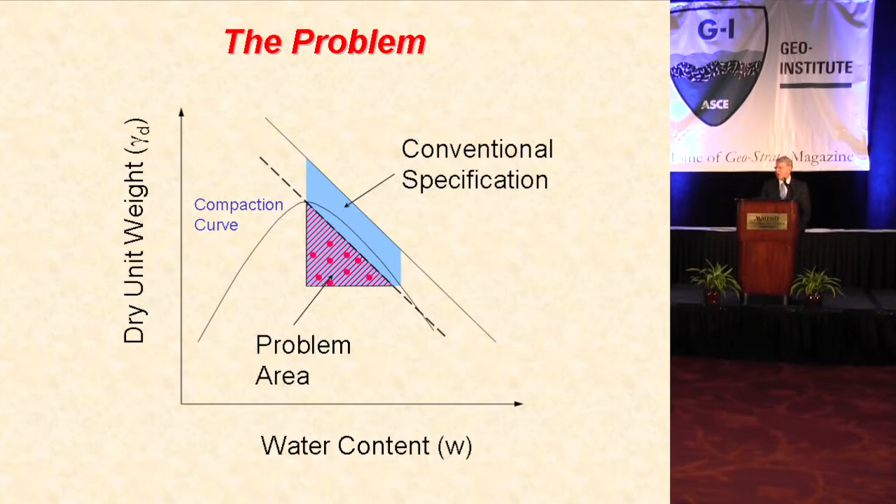The lower left corner may be wet of the optimum for the higher compaction energy, but when you go to a lower compaction energy that would pass through the lower left corner, it's actually dry of optimum for that particular compaction energy. And that's at the heart of the problem. The variable density may in fact lead one to be dry of optimum with the actual way that the soil is compacted.

So what do we recommend? This is the procedure that I recommend to you. The way I would suggest is that you realize that you'll never know exactly what the field compaction energy is. So I try to bracket in the laboratory. So the blue curve, look at the lower diagram first. The blue curve is a compaction curve with modified Proctor. I doubt that you're going to exceed that in the field. The red curve is standard Proctor, and the green curve is reduced Proctor.

For example, standard Proctor compaction techniques, but fewer drops of the hammer than you would normally use with standard Proctor. So my sense is somewhere between the green and the blue is reality, but we don't know where it is. And so what we do then is we start compacting soil samples. So I just had a white dot show up at the left side of the blue curve. So you compact up that sample at that moisture density level, and then you run a permeability test on that.

So now a circle just popped up on the corresponding hydraulic conductivity plot at that same molding water content, and that's a really bad sample because the hydraulic conductivity is above the dotted line. It's greater than 1 times 10 to the minus 7 centimeters per second. That's a fail. That's not good. So we keep going. There's another circle that just popped up around optimum in modified Proctor. We run a permeability test at that molding water content on that sample, and the hydraulic conductivity is still unacceptable.

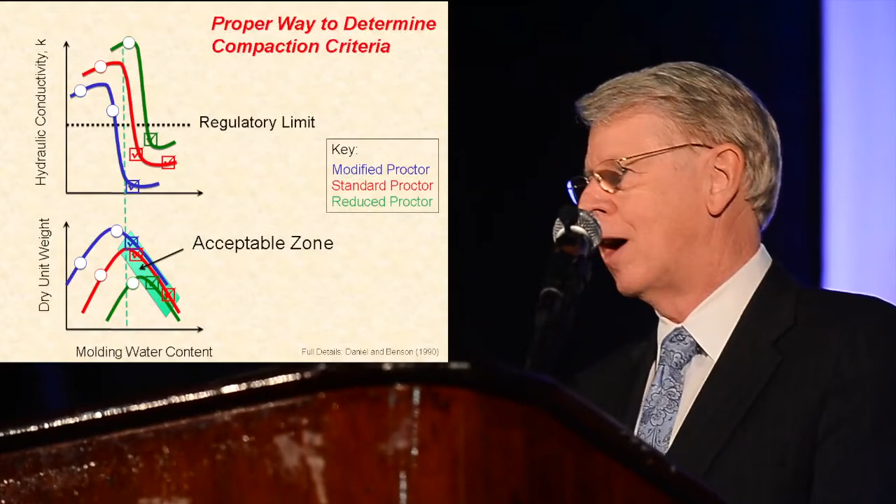So now let's go to standard Proctor. Same thing, we compact a sample, run a hydraulic conductivity test, and you see on the red curve up above, the circle showed up. Not good in terms of hydraulic conductivity. Let's keep going. There's one that happens to give a good hydraulic conductivity and so forth, and then let's do it for the reduced Proctor and so forth. So the checks on the lower diagram basically gave satisfactory hydraulic conductivities in the upper diagram.

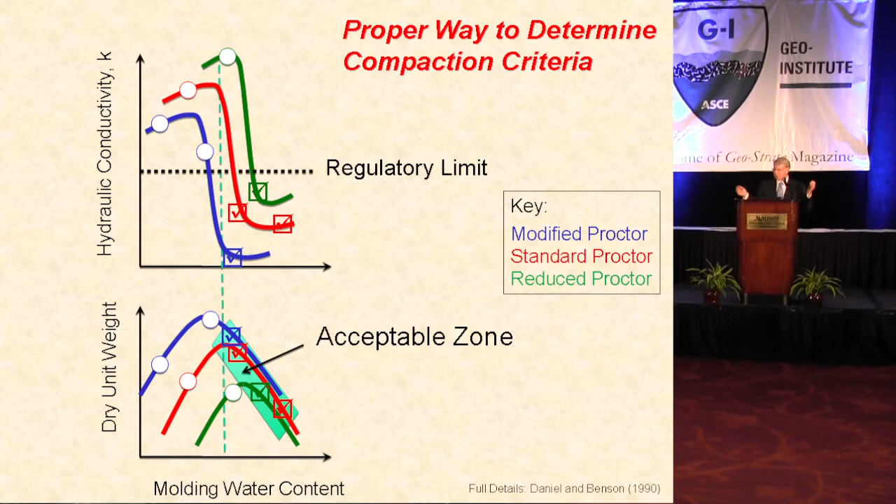Then what you do is you draw a moisture content density specification that encompasses the good points and rejects the bad points. That then becomes a rationally based moisture density compaction specification based upon variable energy of compaction. And I would submit if the field values are in that green zone, that's about your best chance of getting acceptable hydraulic conductivity.

Well, you can also use this method when there are other criteria because hydraulic conductivity isn't the only thing geotechnical engineers worry about. Shear strength, for example, is one of those. So you can do this series of tests for hydraulic conductivity and do the same thing with shear strength. It could be, for example, unconfined compression strength. It could be interface shear strength between the compacted clay and a geomembrane.

And of course, when you do shear strength criteria, you're going to tend to exclude the low density, high water content points. So the brown zone, not surprisingly, is higher density, lower water contents. But with any luck, if the gods of permeability and shear strength are shining on you that day, there will be a zone that both provides acceptable hydraulic conductivity and acceptable shear strength. We've done this as well with desiccation potential, just measuring shrinkage cracking. You could put other parameters in as well.

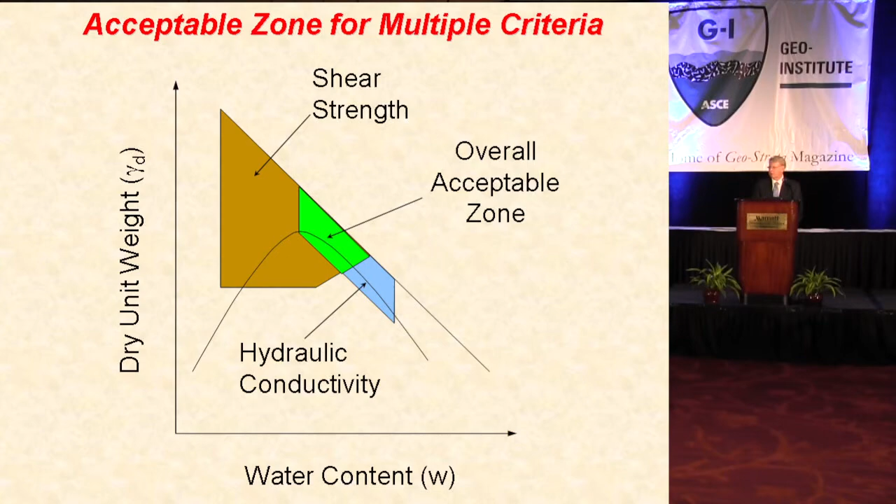I wish the industry would do this more often, and I wish the industry would abandon the completely arbitrary way that moisture density curves are typically written. I'm not saying they aren't perfectly fine for structural fills, but honestly, the most dangerous person on a clay liner job site is somebody who's only done structural fills and they've never done a low permeability clay liner, because the rules are different when you're dealing with these thin liners.

Let's shift gears again. So there's another miracle, a new kid on the block. Somebody develops a commercial product, a thin, prefabricated layer of clay to replace a thicker clay liner.

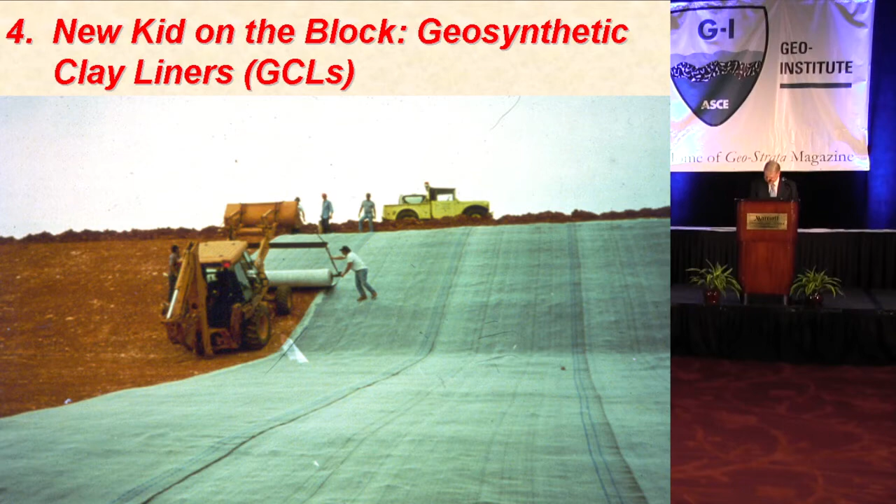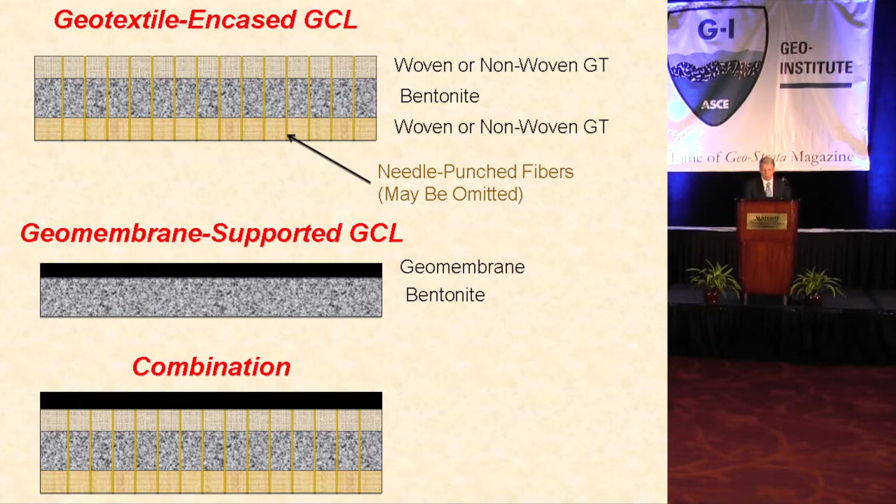So they just built these sets of facilities, and suddenly, almost instantaneously, moderate amounts of flow are showing up in the leak detection layer. And of course, we didn't call it leak detection layer, we called it secondary flow collection system, but still everybody thought of it as leak detection layer. So you've got this brand new Cadillac hazardous waste site, and at least in some people's eyes, it's leaking right away. And Bill said, what can I do to stop that?

So his idea was to put a GCL under the primary geomembrane liner so that through those pinholes, of course, the liquid would tend to pass, but it would hit the GCL, which would essentially stop the flow and make the flow in the leak detection layer go away. And so that was, in fact, the first application. And as you might imagine, it worked great. I mean, it did exactly what Bill wanted it to do, and Waste Management continued to use it.

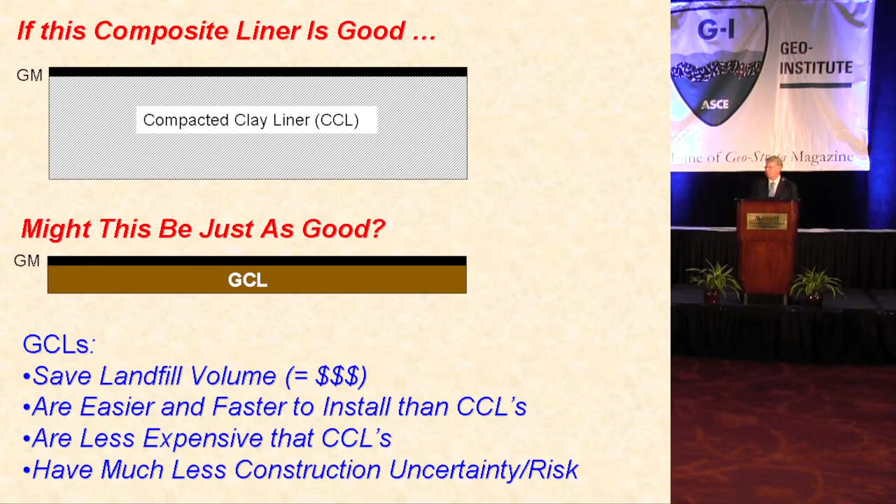It's much faster and infinitely easier than compacted clay liners, typically much less expensive than compacted clays, and maybe as importantly, there's just a lot less uncertainty, especially about schedule. You don't have to build test pads and wait months. You're talking about days with certainty, not months with uncertainty.

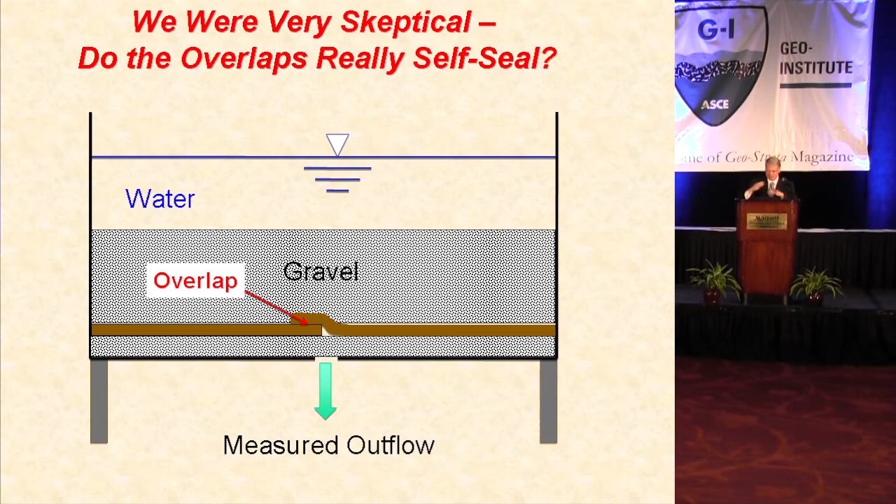So the GCL salespeople came to us. Of course, I asked EPA for money, and they said yes. Those were the good old days. And I'll confess, I was very skeptical. The salespeople came up to me and said, you just overlap these panels and they seal themselves up. And I said, I'll believe it when I see it. And by then, I was pretty skeptical of small-scale tests. So we built some large tanks and decided to test the overlaps to see if they really worked as they were supposed to. Here's one of the GCLs.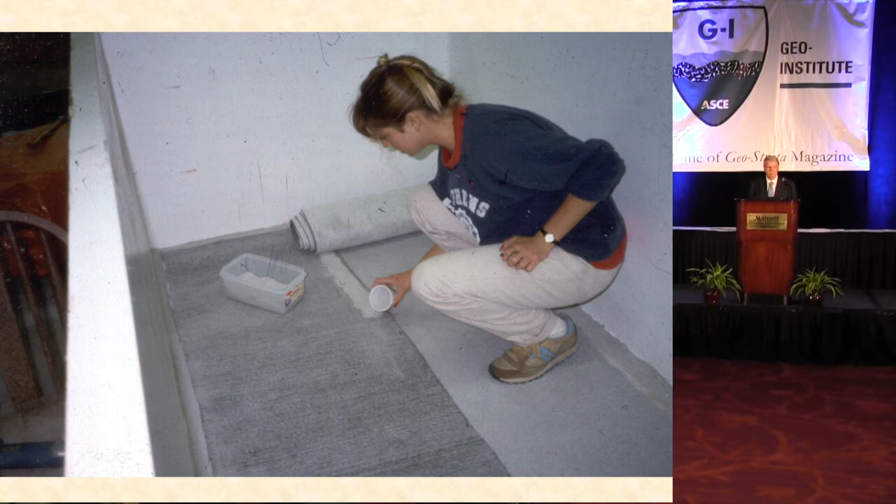Here's the geomembrane-backed GCL. This has the geomembrane side facing up, the black surface being overlapped. We filled the tanks with gravel.

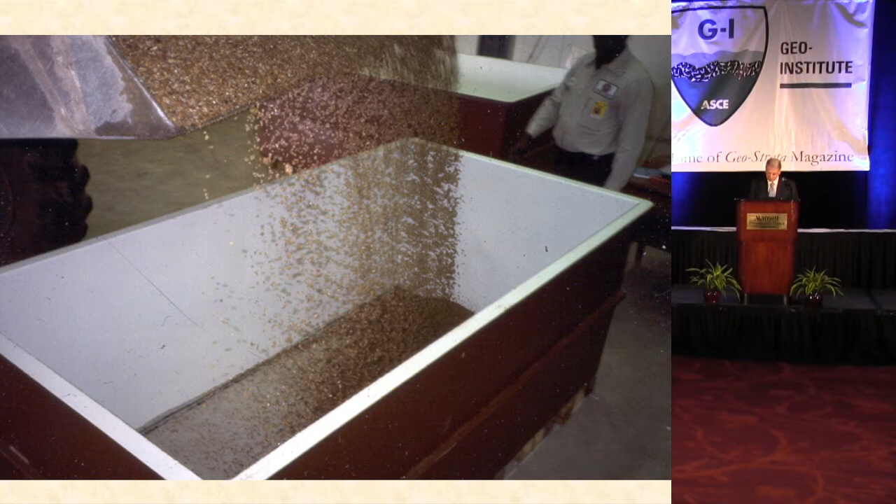That was a tough one for Paula to shovel all that gravel out. She graduated with significantly enhanced upper body strength and an education. What more could you ask for?

And we filled the tanks with water and measured the outflow rates. And here's what we found. The middle column are the control tests with no overlap. The far right column are the tests with the overlap. And indeed, the overlaps worked great. There was virtually no difference in the average hydraulic conductivity with and without overlaps.

And notice for C, that was the geomembrane-backed GCL when they overlapped it. We had absolutely no flow in 5 months. And when I peeled back the overlap, the water had only migrated about 2 or 3 inches into the overlapped area. It didn't even get beyond that.

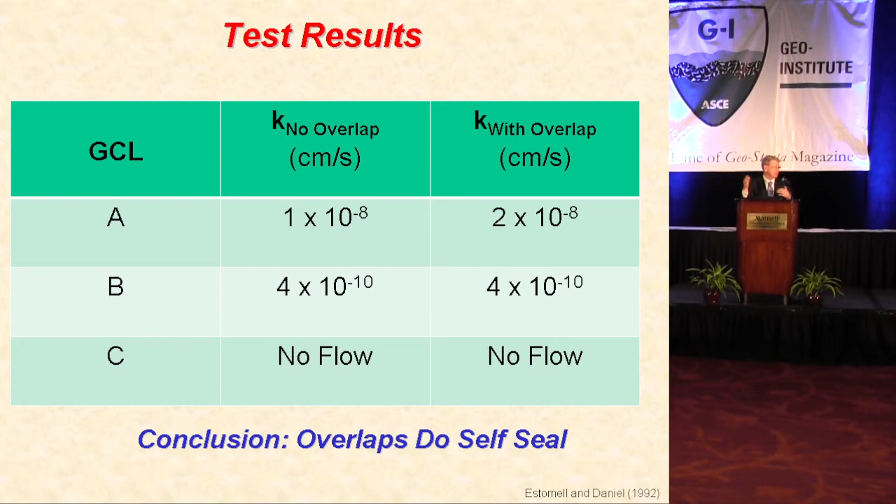Well, that led me to wonder, well, what about bentonite sort of sandwiched between 2 geomembranes? And so we decided to just put a geomembrane-backed GCL with the geomembrane side down and the bentonite up, put defective geomembranes, this one had slits and holes in it, cover it with gravel, flood it with water, and see what happens. Well, 5 months later, Paula excavated the gravel.

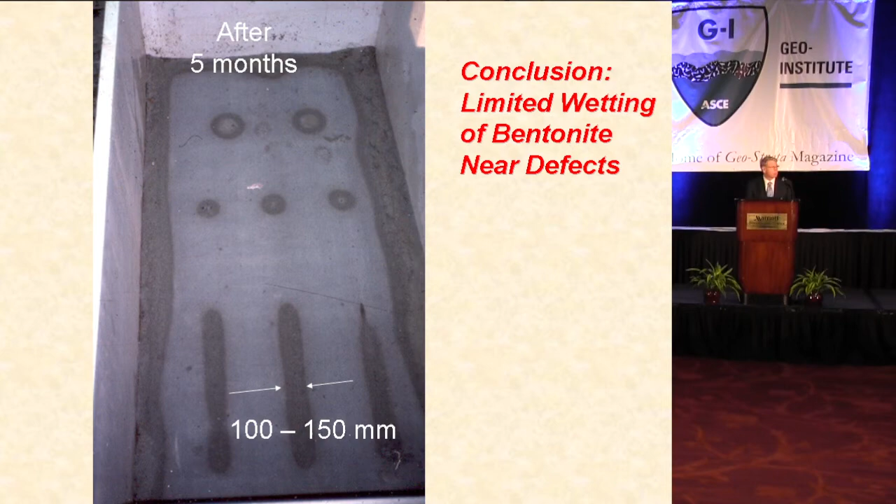I love Paula Estornell. And we looked at what the bentonite was like, and you can see the wetting patterns here. Actually, the water penetrated minimally into the bentonite because such a great seal was formed between the geomembrane and the bentonite. So my favorite lining system is actually, in some ways, a geomembrane with bentonite sandwiched between 2 geomembranes.

And the reason why I like this system so much is you can imagine an occasional imperfection in the overlying geomembrane. Well, for water to get out, it's got to get into the bentonite, hydrate it, and the calculations show years for it to get a meter or 2, hundreds of years actually, to get many meters, to find another outlet at the bottom and somehow get out. And you can imagine how incredibly impermeable this system would be.

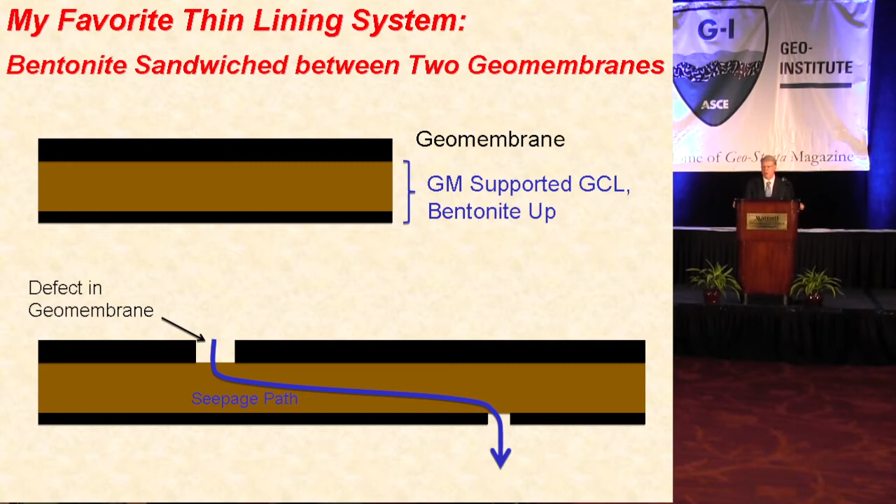In fact, it has only 2 drawbacks. One is bentonite, when it does get wet, is very slippery and low shear strength, so you use this with caution on slopes. And the other concern is sometimes crazed construction workers puncture holes in things. And so this, because it is thin, is vulnerable to puncture. To that, I would say put maybe 12 inches of a clay liner below this, so you've got this system sitting on top of something that's completely puncture resistant, and to me, you have a phenomenally impermeable liner system.

And I guess the biggest problem I've seen with GCLs is overzealous salespeople convincing people to buy GCLs and use them in applications for which they shouldn't be used. I remember talking to one of the GCL manufacturer's engineers early on in this, and I said to him, "What's your job?" And he said, "My job is to keep the salespeople in check and keep them from doing something really dumb." So do be careful about the applications. And of course, slope stability is a critical factor.

I'm not going to describe in detail these full-scale tests that were done with Rudy Bonaparte and Bob Koerner, but slippage did occur on 2-to-1 slopes. I guess what really struck me about this is if any one of the consultants had run interface shear tests on these materials, they would have concluded that this slope would fail. It's amazing, though, when you do something in the field and you actually see it happen at full scale.

It's just phenomenal how human nature plays into this. And Rudy Bonaparte can show as many interface shear tests as he wants, but when you build it and you actually see it in the field, it does have an effect. I think we have a pretty good grip on interface shear factors, and I think it's just a matter of following best practices.

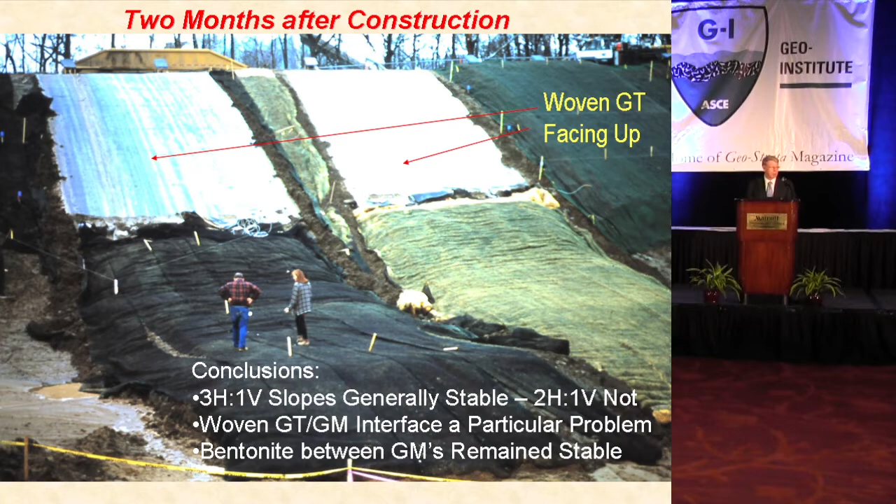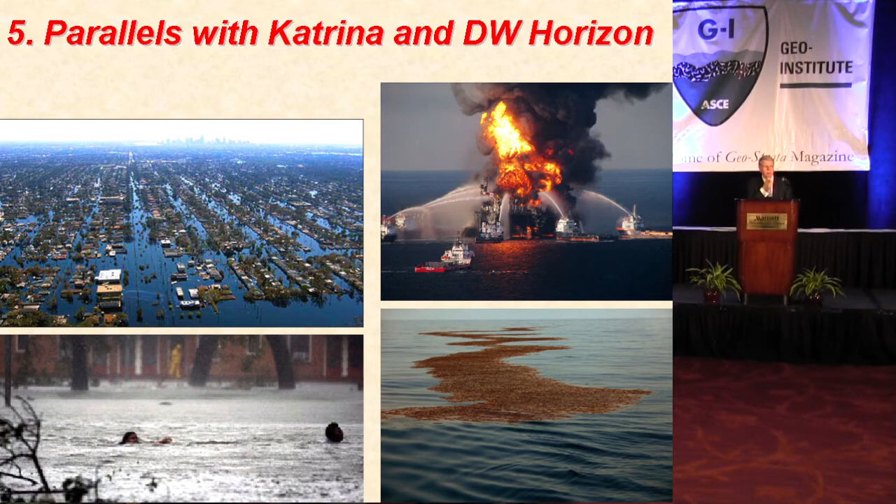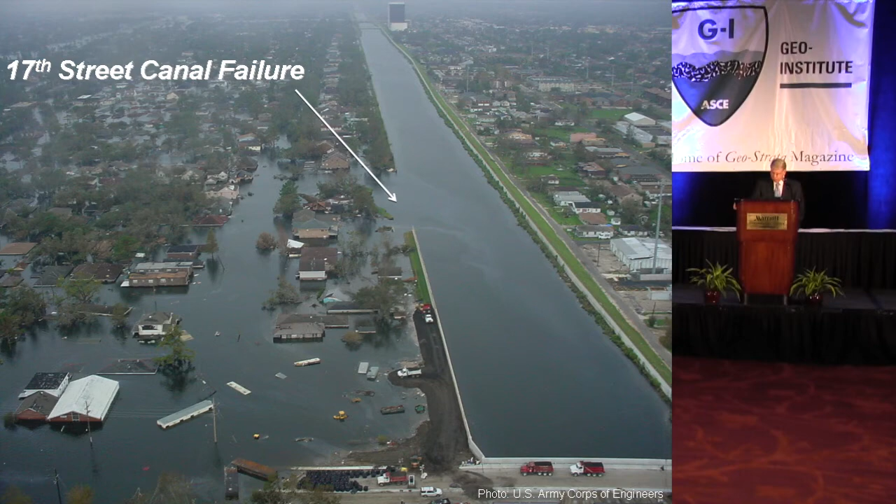Well, I mentioned that I had the privilege of working on the New Orleans levees and Deepwater Horizon, and I'd like to close this conversation out really with some reflections upon safety and the extent to which engineers do or do not let safety drive their engineering. And for the New Orleans levees, I want to focus on the 17th Street canal failure. It was a very intensively studied canal failure.

Now, I remember when I worked here in Oakland, I would never use a factor of safety of 1.3 except a temporary slope where nothing bad would happen if it failed. Now, if those of you who are geotechnical consultants routinely use factors of safety of 1.3 or less, I stand corrected. Practice has evolved. But to me, at least, I would say that is a very strange factor of safety

for a safety-critical design. Now, granted, the hurricane's only going to load this up once every 50 years, and it's only going to load it up for about 12 hours, and then the water will recede. And in that sense, it's very tempting to use a low factor of safety. But we all know when you think about factor of safety, number one question probably should be, what's the consequence

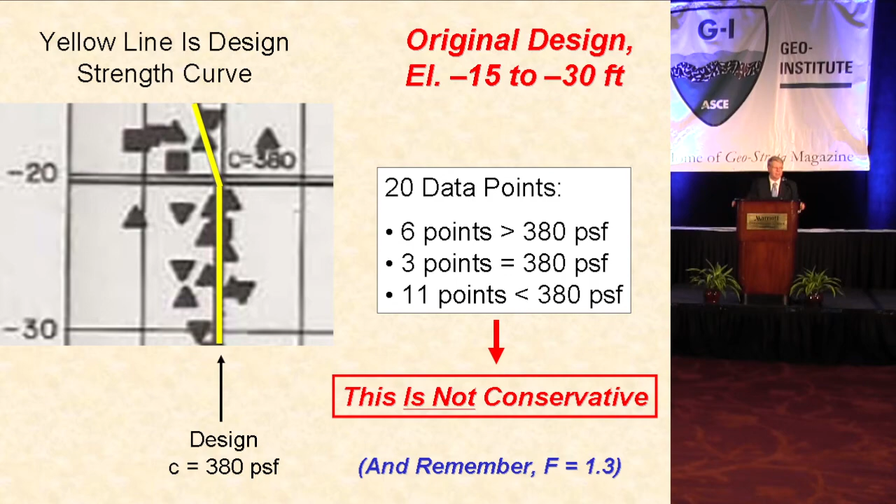Furthermore, you can think about averaging sometimes for vertical piles where you integrate vertically and you'll be a little higher and a little lower. But a long wall, in many respects, is like a chain where the weakest link will fail. Well, along a long wall, the weakest 50 meters of wall or soil along the wall is, in fact, the most critical one. So averaging would be no more appropriate in that circumstance than averaging the strengths of a bunch of chain links would be in figuring out what the strength of the chain is. And remember, the factor of safety was only 1.3.

So in obtaining soil samples for shear strength measurements, the engineers drilled exactly where I would have drilled, at the crest of the levee, because that's the easiest place to drive a drill rig. But the failure surface didn't limit itself to underneath the crest of the levee. The levees had been in place for decades, so the soil was fully consolidated. And in fact, the strength at point B was considerably higher than the strength at point A. Soil mechanics 101, I would say, and yet that was not taken into account. They used the strengths at B rather than A.

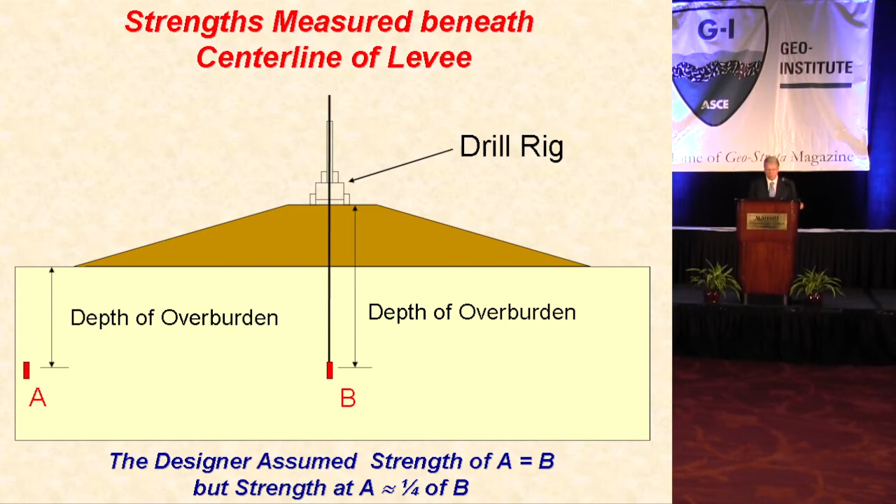Now, we boring engineers don't want to be on that part of the curve, right? We want to be on the lower left part, where even if we're wrong a little bit, nobody pays any attention and life goes on.

Well, the research report said, although the test wall was not loaded to failure, failure may have been imminent. And the remarkable thing to me is that failure was imminent, but nobody said, but the factor of safety was 1.47. What are we missing here? Maybe we ought to go back and look at the designs and figure out what was missing. But you know, that happens in so many organizations.

You know, one group finds one thing and somehow it doesn't make its way to the other. The Deepwater Horizon disaster, which caused the loss of more than 10 lives, truly was a disaster, and I'm not going to spend much time on it, but I do want to point out two findings.

First of all, just before the explosion, the crew did what was called a negative pressure test. With the drill pipe in this 18,000-foot deep well, they put a packer around the drill pipe and essentially lowered the water level inside the drill pipe. So if the cement seal down at the base of the well was tight, the water level would not rise. And that's why they call it negative pressure, because you lower, in essence, the fluid pressure inside the pipe.

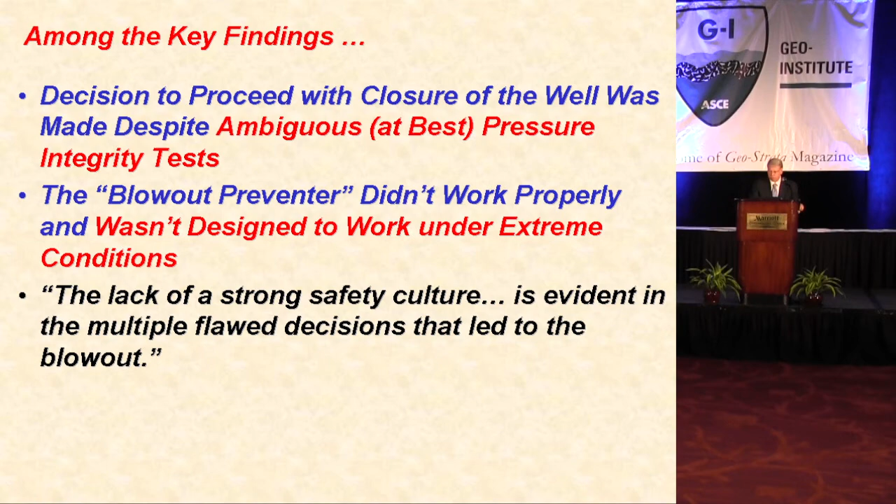And because it was in compression, imagine trying to cut a string. It's easy to cut a string when it's in tension. If it's in compression, it's not so easy. So the compression actually jammed the pipe into the jaws of the device, and it never closed all the way, and the liquid went right around it. Our report from the National Academy said the lack of a strong safety culture is evident in the multiple flawed decisions that led to the blowout.

So I thought about these 3 different things, the work in the geo-environment, especially in the early days. Item number 1, I would say in all 3 cases, safety was not the top priority. I think of the consultants who were in denial about organic chemicals, the consultants who didn't want to challenge whether the small-scale lab tests were valid. New Orleans, I'd blame Congress as much as anyone for putting so much financial pressure on the Corps. And clearly with Deepwater Horizon, as they made decisions about the negative pressure test, for example, safety was not the top priority.

It's so interesting in item number 2 that people ignored or chose to ignore some really vital test results, the permeability results, the field results, the E99 test results. I'm not sure ignored is the right word so much as didn't get incorporated into the culture of a complex organization. Item 3, a common element is that these techniques suggest a disruption to standard engineering practice.

Moisture content density test, that acceptable zone, different from standard practice. Field testing on test pads instead of laboratory tests. In the case of New Orleans, the higher design hurricanes, the information from the E99 test would have all disrupted standard practice, and certainly the oil industry was very confident in its procedures and is not desirous of any disruption.

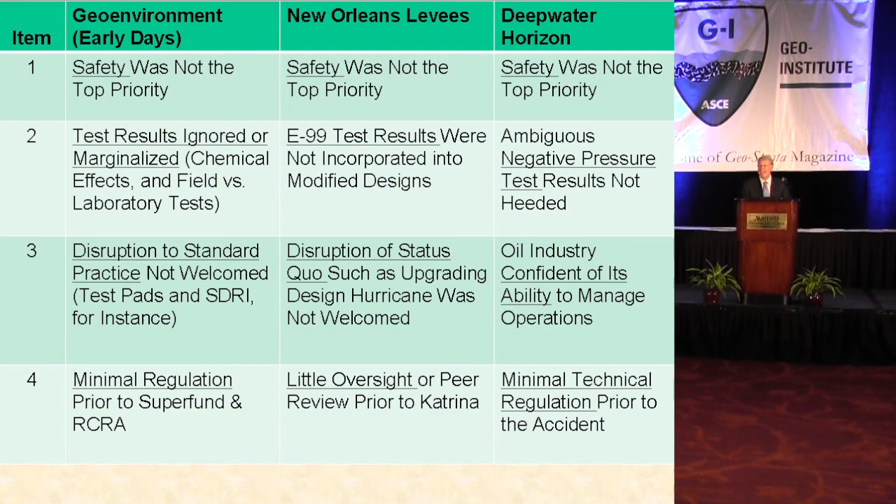And finally, in the early days of the geo-environment, there was no environmental regulation. And in fact, as much as you like or dislike the federal government, without the EPA coming in with the heavy hammer of enforcement as codified in law, I don't think nearly as many changes would have occurred. And in Katrina, I wish there had been more peer review, Bill. I wish the Corps had been given more money to do it right. I think they would have done it right. And certainly in the case of Deepwater Horizon, there was almost no technical oversight and regulation of things like the negative pressure test and so forth.

So those are some of the common elements. The first canon of the ASCE Code of Ethics says engineers shall hold paramount the safety, health, and welfare of the public. And if there's one integrating message from these cases, I think that's even more true than ever. So when you go home proud that you're an engineer, I hope you go home proud that you're upholding this ethical standard. It's a very important one.

And from my experience, the main two issues are when something comes along that is disruptive to the status quo, everybody's natural tendency is to stick with the status quo. Whether you're a hard disk drive manufacturer in the computer industry and somebody comes up with a better way of doing it, or you're a consulting engineer with a perfectly fine and healthy practice, your natural tendency is to, let's say, dismiss things that are disruptive. I would just suggest that you pause a little bit more, put your engineering hat on, and think through whether perhaps it requires some more thought.

And I do think cost pressures from the owners or clients clearly in all of these cases were a huge factor. Congress in the case of New Orleans levees, and I think ultimately the owners in the case of some of these waste disposal facilities. So where do we go from here with the geoenvironment? Well, if I were a young professor, I'd be all over new materials, geosynthetic materials, trying to find better ways to make bentonite, adding materials that will attenuate chemicals. Sustainable environmental controls, I think, are a really interesting topic, especially for landfills, so that you don't just throw it away and walk away from it, but you make them digesters or processing units.